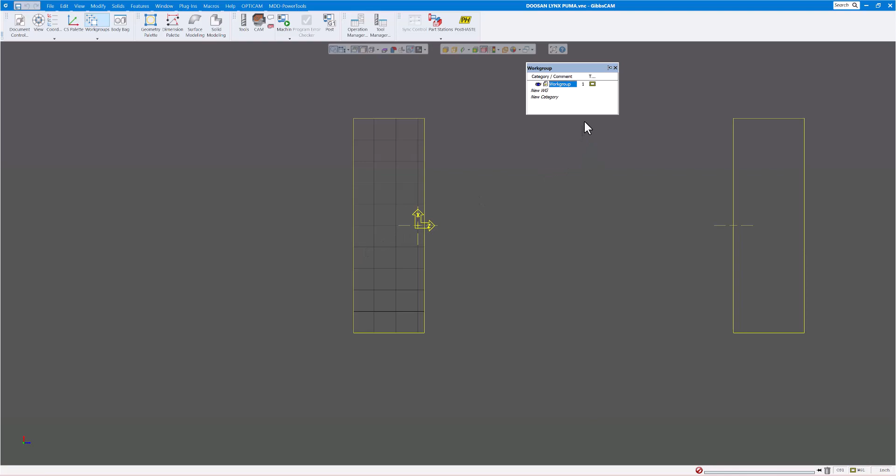So let's get started. I'm going to go to File and New. I'm just going to call this, we'll call it Doosan Lynx Puma. And it's going to open up a blank screen for us.

Next, I'm going to choose the machine, so I'll go to Document Control. And you can see there's a whole tool list here of the different machines that I have in mind. Yours will be different. I'm going to choose this post right here. And I'm not going to really fill in any blanks here quite yet. Now it's going to open up a blank screen, and the screen may or may not look like mine when you open it up, but that's okay.

So the first thing we want to do is, of course, import the file. So let's go to File. We're going to be using a solid model. So let's do import, and this is going to be an MTM part 4. As you can see, there's a little preview here. It's a SolidWorks file, so I'm going to click on Open, and it's going to bring it into Gibbs.

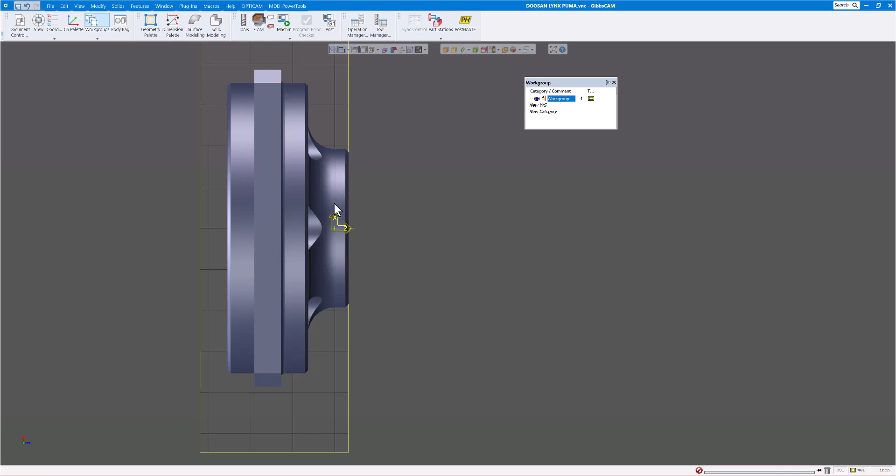Now, as with all solid models, when you bring in a solid model into Gibbs, it's going to put the origin where the engineer decided to put his origin on the part when he engineered the part. And as you can see here, the Z0 is a little bit behind the part here. Now there's a couple ways to put the Z on the front. You can either right-click and say move the part origin to the front.

But an easier way for me is I'm just going to go to Modify and click on Shrink Wrap. That'll wrap material around the whole part there, and this will tell me the actual size of the material or the part that I've imported.

Now, as you can see, I have the main spindle, sub-spindle here, which is somewhat annoying when you go to unzoom, because you want to work on the main spindle or the sub-spindle, and so you have to pan over. So to eliminate that, if you go up to the part stations, and as you can see, it has both the main and the sub-spindle open. I'm just going to close the eye on the sub-spindle. Now when I go to unzoom, you'll see it's only working on the main spindle here. When I get to the sub-spindle, I'll turn this back on. So for right now, I have a shrink wrap.

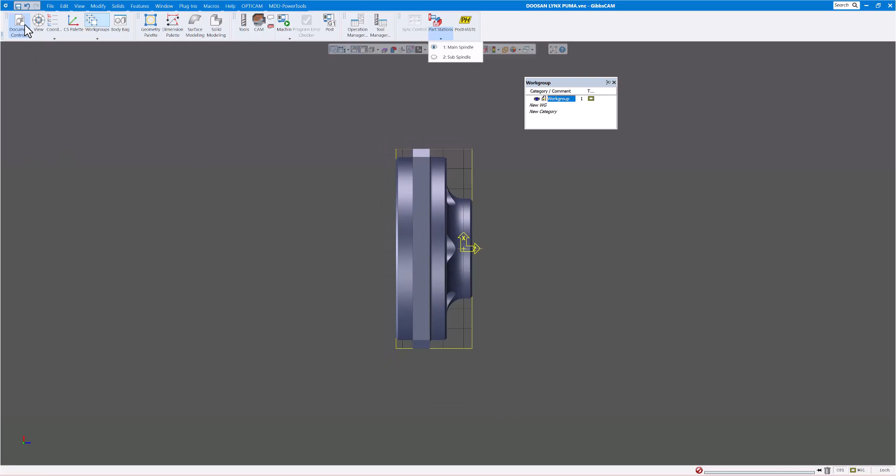Go to Document Control. And as you can see, it says there is material. There's 128 thousandths of material from my Z0 to the front of the part. Well, we always want to program the front of the part as Z0. So when we face off our part at Z0, that will be the actual front of the part. So let's move that just by going to Modify, Move Part Origin. I'm just going to move the Z 128 thousandths, and as you can see, it says Z0 now, and my Z is in the front of the part.

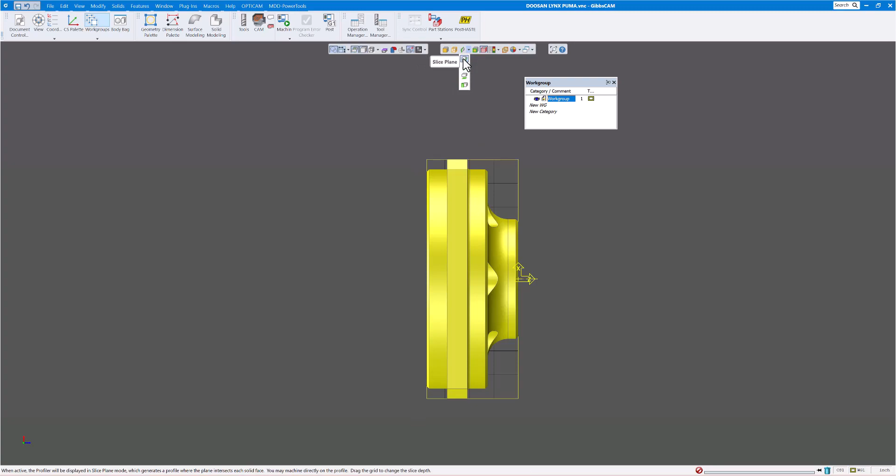Now before I do the diameter of the part, as you can see, doing a shrink wrap does not take into account the flats here, or this little flange here. So first thing I'm going to do, click on my part, and the easiest way to get geometry off of a solid model when you're turning is to go up here to the what we call the profiler, and there's 4 different choices up here. The slice plane, which we use a lot for the XY and YZ, and this one here says slice spun body. So what that does is it gives you the geometry as if the part was spinning in a lathe.

And as you can see, if I click here, right click and go to extract the profile, then I turn this profiler off. As you can see, there's the geometry to cut this whole part as far as the turning goes. And as you can see, this is higher up here. That's because this is the diameter it would be when it's turning the part.

So now if I did a Modify Shrink Wrap again, you can see this has changed. So it wrapped stock around the part here.

If I go to my document control now, you'll see this says 4.069 would be the material we need to cut the outside of that and clear the part. Well, you're not going to find material at 4.069, so the closest material is 4 1/4. So we're going to say 4 1/4 there.

Now we want to add a little material on the front of the part and the back of the part as well. You're not going to cut your material with the saw right to size, so we need some extra there. So I'm going to add 1/8 of an inch to the front, and as you can see, the stock just moved 1/8 of an inch.

Our part is minus 1.125 to the back here, so I'm going to add 1/8 of an inch to that as well, so I'll go minus 1.25, giving 1 1/4 there. So the overall length will be 1 3/8 total on here. I have 1/8 inch in front and an extra 1/8 inch in back, as you can see right on the screen. So now we have to decide where we're going to grab the part with the chuck.

I'm probably going to grab approximately right around here. Probably stay away from this flange, because when I mill the flange, I'm going to do that on the main spindle. I need to have a little extra there so I'm not actually cutting into the jaws with my end mill.

Now I'm going to add a couple of extra points in here just as reference to where I'm going to grab with my main spindle and where I'm going to grab with my sub spindle. So I'll turn on the geometry palette, click on point XYZ, and my first point is minus 1.250, just like it says down here. And the diameter, I'll just put 4 1/4, just like our material is. So there's a point right there, right on the end of the part here.

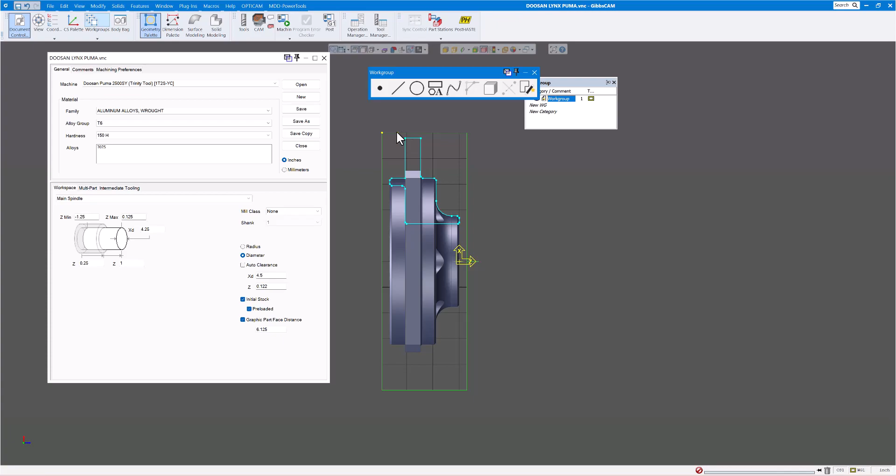Now on this, I'm probably going to grab right about here. Let's just dimension that so we can see where we're at. So that is Z minus 595. I'm probably going to add, actually grab on at 1/2 inch there. So I'll click a point, say minus 0.5, and since that's about 2 3/4 diameter, I'll just put 2 3/4. So this is where I'm actually going to grab with the sub spindle.

If I dimension some things here, let's just dimension from here to here. You can see that's 3/8. Let me bring that on here. 3/8 - grabbing on right there, which you can see is 1/4 inch, and it's 3/8 from there. And if I dimension from the front of the part to where I'm actually going to grab with the sub spindle, you can see that's 1/2 inch there. Okay, and you can always turn dimensions off here if they get in the way.

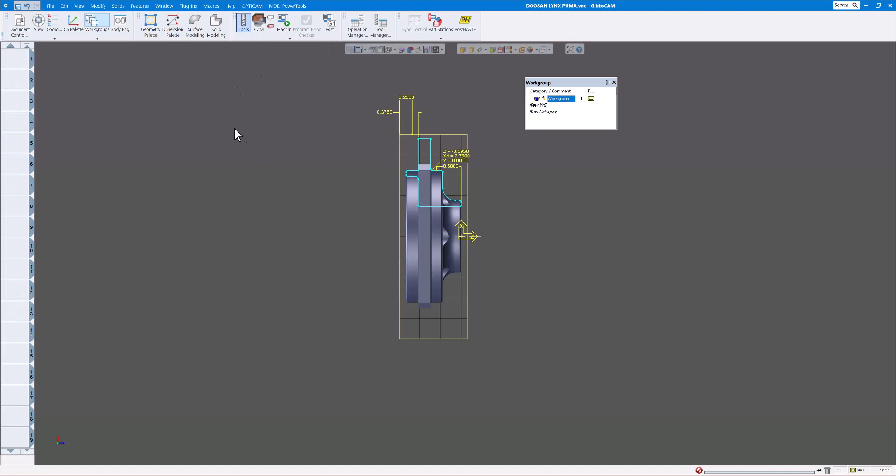So now we have our turning defined here. Next we're going to bring in our tools. I'm going to turn on our tool palette, and I already have the tools predefined, so I'm going to import those in and we'll go through them. If you already have the tool list saved, which is a good idea, you don't have to create them each time. I'll go load tools - I already set the folder where I stored all my tool data, the Doosan tool list. And as you can see, here's the tools. So we'll go through each one individually.

So the first tool I'm going to use is the 1 1/8 drill. This is basically an indexable drill, so it's almost flat at the end. I usually put about 175 degrees on there.

It's not quite flat, so this will give me the closest approximation to actually what the drill is. Of course, you could always import a solid model if you wanted exact, but this is good enough for what we're doing. I have this in position number 1, 2 flutes, tool length offset 1 and 1, and this is just

Actually a carbide insert. And I usually give it a name here so when I'm looking at the code out on the machine I can see if this tool is going to the main spindle or sub spindle. So that's what I usually put right at the beginning on there. Makes it much easier. Also makes it much easier when you hover your mouse over to here, it'll pop up that note saying this is main spindle drill static or whatever name you gave that.

So the next tool is going to be an 80-degree diamond CNMG, 32nd tool nose radius, 1/2 inch IC, thickness 1/8 or 3/16. You can choose either one of those depending on what you have. Even if you chose 1/8 inch or 3/16 or 5/16, the G-code output's going to be the same. What this will do is just bring up different ANSI holders there based on the thickness.

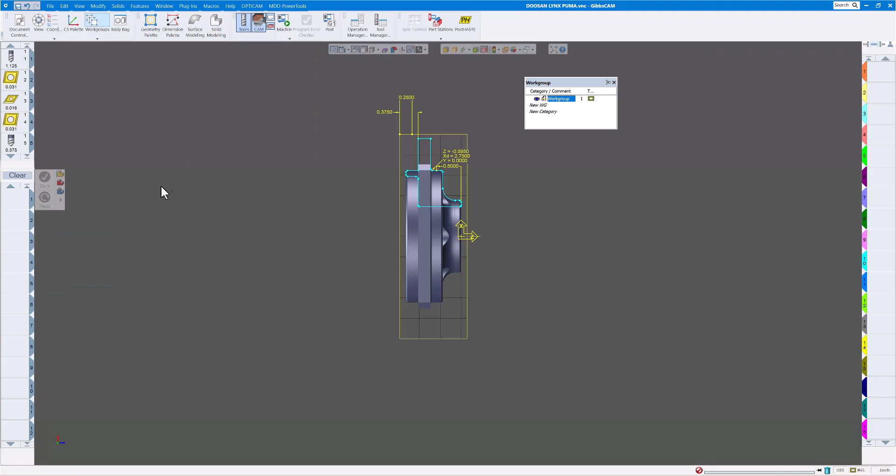Okay, so now we have all our tools defined here. Now let's go ahead and start to machine this part.

Let's turn off our dimensions here.

Before I start machining, I'm going to make a few different work groups here. This first work group, I'm going to name main and sub turning. Let's expand this just a little bit, and scoot this over a little bit. So I'm going to make a new work group, and this one I'll call milling main sub.

Okay, so now I have my work groups named, and of course you can create as many work groups as you want if you want to separate the geometry here, because sometimes if you have too much geometry in one work group, it overlaps and it's a little bit hard to choose. So that's fine, you can create as many as you like.

Now when you have the MTM post-processor loaded for this type of machine, you will automatically have 6 coordinate systems already defined. I actually added these two windows together here, so when I drag them they both kind of match up with each other, so that's fine.

Okay, let's size this up a little bit better. So with the MTM and VMM on your post-processor, you'll have the 6 standard planes there. Let's unzoom this to show you a little bit about that.

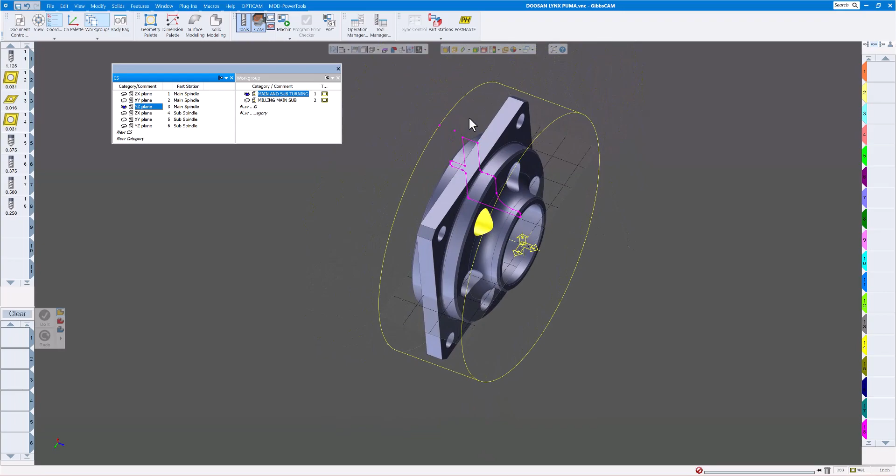and the milling around there. The YZ plane, as you can see, this is for any tool that is coming from the radial side or the top side, the X side. You have the ZX plane, which we don't have turned on yet, but that's for the turning for the sub-spindle. And again, you have XY plane for the sub-spindle and YZ plane for the sub-spindle. So we'll work on those when we get to the sub-spindle.

So let's go back to the ZX plane. And of course, you can create as many other coordinate systems as you would like. If you have holes at odd angles, things like that, and you want to create more coordinate systems, you can always create more. That's fine. These are just the 6 standard ones, which is the most common that we use.

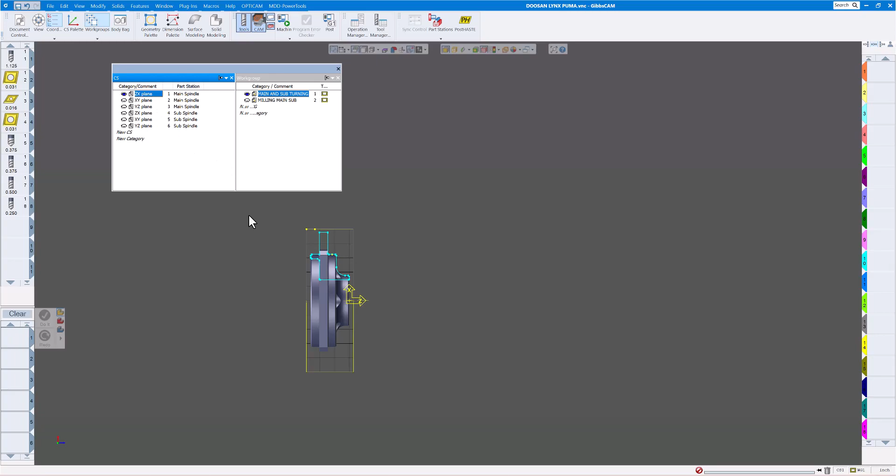So let's start programming this. Let's open up our tools and CAM, which we have already. So the first thing I'm going to do is face off this part. I'm going to use a roughing process along with this tool here. As you can see, as you hover over it, it shows you the description of the tool. So click on that, and that's going to load the tool up.

And I want to do a front face here. So this is where it's going to rapid to. I think in my document control here, let's fill in a few of the blanks while we have it open. I have 1/8 of an inch material on the front, an extra 1/8 inch on the back, and 4 1/4 here.

Also on these two here, these are very important before we start programming. This is the clearance for the tool, meaning the tool is going to rapid to these 2 locations before it starts cutting. And when it gets done cutting, it's going to go to these 2 locations and go home to do a tool change or go to the next process. So these always need to be bigger than these here.

So let's change this a little bit. 4 1/2 is fine for the OD, and this Z, I want to stay 1/4 inch away from the material because remember we have an 1/8 of an inch sticking out already.

Now this graphic part face distance, if I uncheck that, that would mean the distance between the main spindle and sub-spindle on our screen, not the machine, is going to be approximately 24 inches or whatever the machine actually is on your floor. But we don't want to have to pan the screen with the main spindle and sub-spindle being 24 inches apart or longer, especially if you have a 1500 millimeter bed length. You don't want to keep panning the part on your screen.

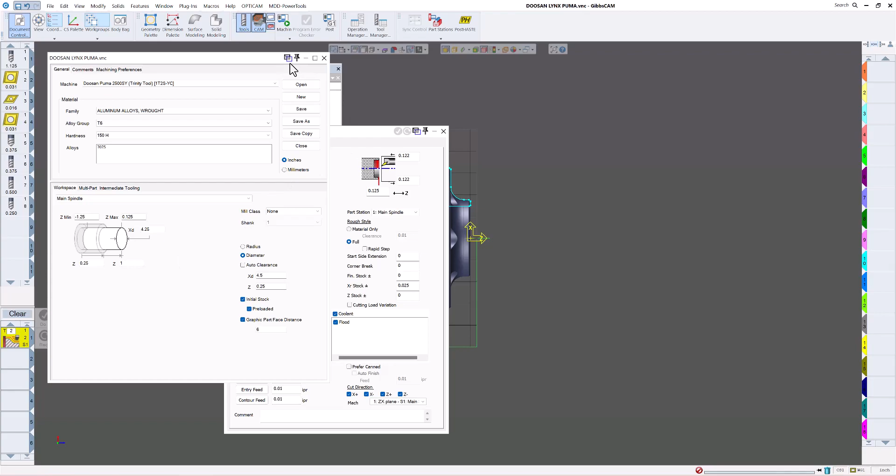As I said in the beginning, I'm going to grab onto the back of the part by 1/4 inch. So that means there's going to be 1/4 inch material inside the jaws of our main spindle. And for the outside, let's look at the total width of my part. Let's bring this back up again, move this out of the way, and bring up my document control.

So how much is sticking out of the front? If I turn on my dimensions here, here's the front of my part. You can see it's 1 inch from where I'm grabbing with the jaws. Then you need to add the 1/8 of an inch there, so this should actually be 1.125 — that's how much material is sticking out of the jaws on the main spindle. This dimension plus the 1/8 inch material we have on the front here. So everything looks pretty good, all filled out correctly.

We're using aluminum alloys as our stock here. So let's turn off dimensions and open up our facing operation again. Here I'm going to rapid to 1/4 inch, and remember we have 1/8 of an inch material on the front of the part. Again, when I'm done cutting, I'm going to go back to 1/4 inch as well.

We're doing a front face, cut forward. Depth of cut, I'm going to go 50 thou. I'm going to use full, not material only — I'm going to use full. And for the XR stock, I'm going to leave 0.

So let's just fix that. But for Z, I'm going to leave about 3 thou because I want to back face with the finish tool to finish that. I want a little bit of stock on the Z, not too much, because if you back face with too much stock using a 55 degree tool, you'll get a lot of squealing and bad finishes.

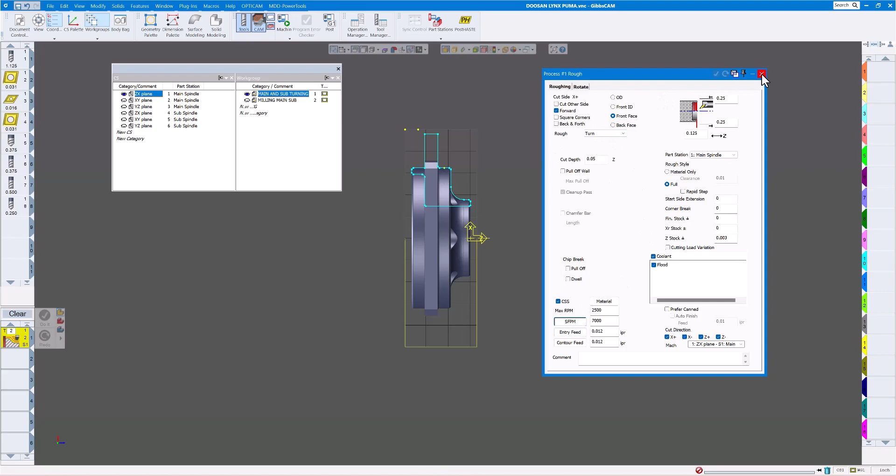So let's zoom this up a little bit. Let's click on this front of the part right there, and make sure we're on the top view. I'm going to take this white round marker and put it above the part there. Of course we want to face down, so I'm going to click the arrow down, and where I want to end is going to be right at 0. Okay, let's click on do it.

And I like that, that looks pretty good. But one thing I want to change is I don't want to face all the way down to Z0, because I have this hole here already and I'm just wasting time going clear down to 0. So like I said, I told you I was going to make some mistakes — this is exactly what we're going to do. So I don't want to face first, I think I want to drill first.

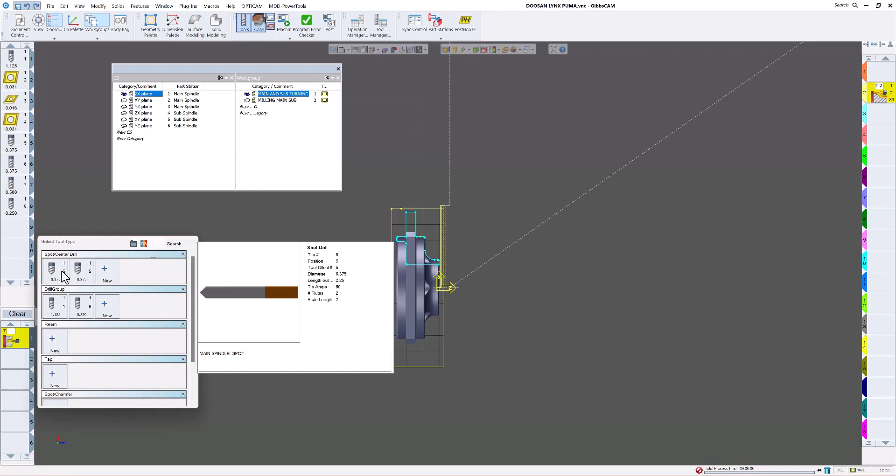So I'm just going to move this operation down here and clear this out. I'm going to double click here, and this time click on holes, and choose this 1 1/8 inch drill. It brings up this process block here. I'm going to click on drill, feed in, rapid out. Again, I'm going to rapid 1/4 inch away and 1/4 inch when I'm done, remembering there's 1/8 of an inch material when I'm starting out. And here you can either program by the tip of the tool or by the full diameter.

I want to do the full diameter. If I turn on my dimensions here, you can see this is actually inch plus 1/8 and 1 3/8. So if I look at my document control here, I can see it's 1.25 inch back. So I'm going to say -1 point.

We'll just say 375 to round it off. It's going to tell you where the tip of the tool is based on the tool angle. So we'll click on RPM and plunge. RPM, I don't really want to go that fast with the jaws. If I was using a collet chuck, that'd probably be okay.

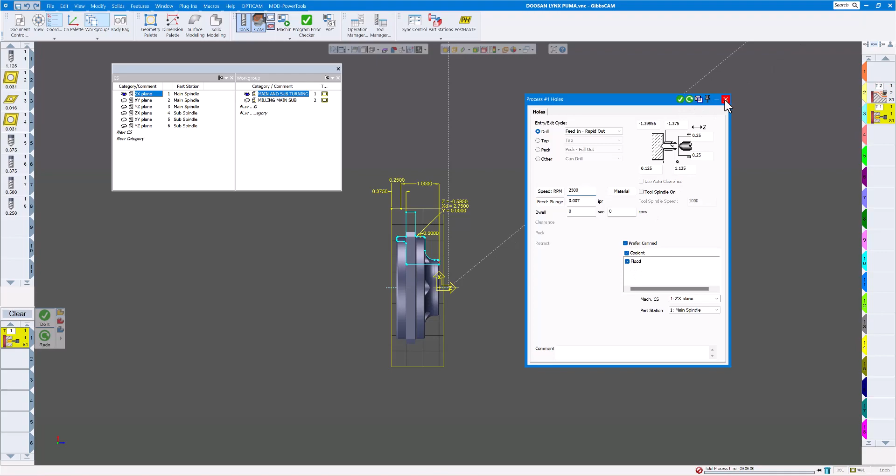But if I'm using jaws, probably don't want to, so I'm going to change that to 2500. Everything else looks good. I'm going to have canned cycle on and flood coolant on. So we'll click do it, and it puts in our process there. I'm just going to move that to the top.

So now the first thing I'm going to do is drill it, and then I'm going to face it off. Let's go ahead and do some op sim here. We'll slow it down slightly so you can see what we're going to do. I'll kind of slice this quarter cut. So there's my drill. That went a little fast. Let's rewind it. Okay, so drill,

face off. If I turn on my geometry, you can see where we cut. Turn that back off. So you can do op sim anytime that you would like. Let's turn off these here.

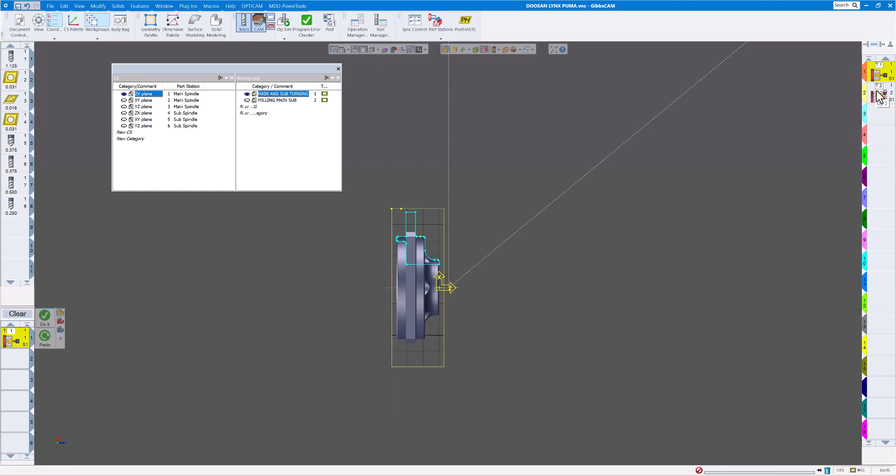So the next thing I want to do, I'm still going to use tool number 2. I'm just going to double click that, bring back that process we used to face it. But now I'm going to change this to cutting OD. Again, our rapid point is 4.5. The material is not 2.52, it's 4 1/4 - that is the stock we're actually cutting from. Again, we're doing OD forward, turning, and cut depth. I'm going to go 1/8 of an inch here.

This is XR, so this is radial. So it's going to take a 1/4 inch cut every time we take a pass. Again, RPM 2500, surface feet per minute, we'll just stay at 1,000. 12 entry feed and contour feed is just fine. I want a canned cycle, so I'm going to click on that.

Now we want to give it a little bit of stock to cut for the finish tool. Everything else there looks pretty good. There, we're on the main spindle. All looks good. So let's zoom this up just a little bit.

I'm going to click on the chamfer, and I'm going to move this tool off there just slightly. Now if you hold the control and shift key down, you can click on the last feature that you want to cut, which is this. Now I could snap right to here, but this is where our jaws actually are, so I'm going to bring it a little bit past there. Now if I want to get more precise, I can right click and say move start endpoint by.

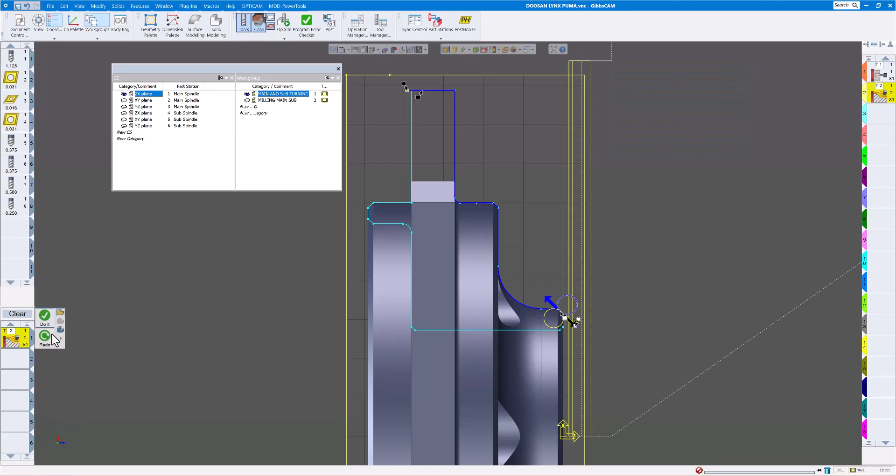And we'll just click on do it, and there's our toolpath for roughing. So let's do Operation Sim again. Facing off. And there is our roughing process.

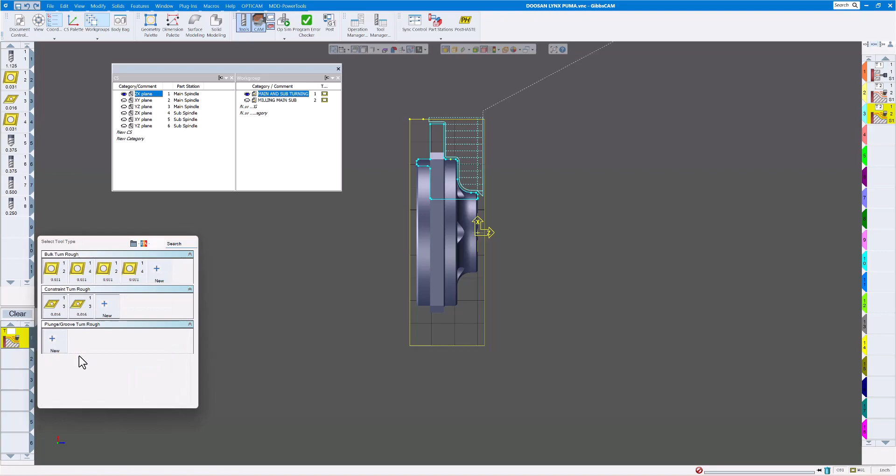So the next thing I probably want to do is bore this out, because I want to relieve any stress. So when I finish this, we're going to have a little bit less stress on there. So I'm going to click on clear, double click here, and we're going to do a rough again. And we want to pick this tool here - as you can see, this is the boring bar.

This time instead of an OD, it's going to be a front ID. 1/8 of an inch, 1.125 is where I want to wrap it to, because that was the drill size that I put in there. So 1/8 of an inch, 1.125 is just fine - that's where I want to wrap it to, out of the part and then back to Z. And this is where the actual material is, so these are all actually the same values here.

So let's change our cut depth a little bit to 80 thou. And again, I'm going to leave stock on the X and stock on the Z. You don't need to put plus or minus here - anytime you leave positive stock, whether you're cutting an OD or ID, it leaves stock on there, so you don't have to worry about plus or minus going the wrong direction. Again, same RPM, same surface feet per minute, and entry feed and contour feed of 12 thou, which should be just fine.

Let's zoom this up a little bit. I'm going to probably click on this chamfer again, going this direction. Control Shift, click on here, and we'll just probably go clear through the whole part here, past our stock.

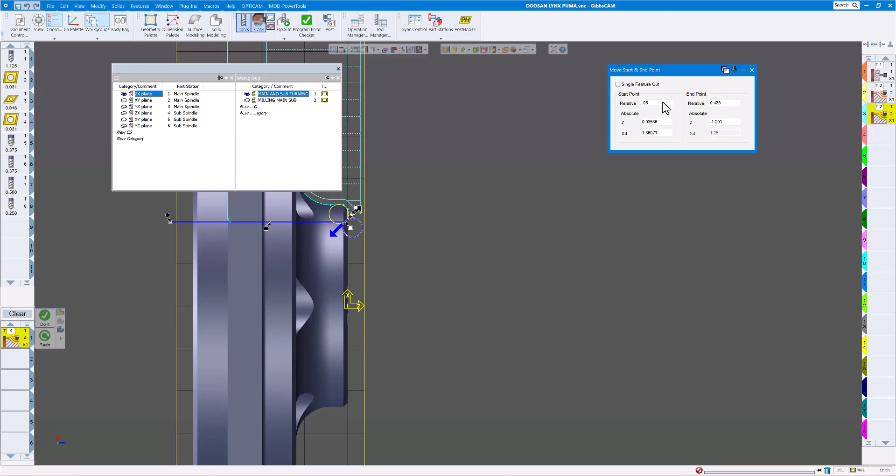If you'd like, you can right click and say move the start or end point. Maybe the start point, let's say 100 thou - that'll get it farther away. If you want to get a little closer, how about 50 thou? That sounds pretty good. Click on do it.

So now we have our roughing done. While we're at it, we're still going to use the same tool to finish. This is aluminum, so we can still use the same tool without worrying about wearing the tip out so much. I'm just going to right click and say change the process - this time I'm going to just do a contour.

Again, ID - if I want, I can get a little bit closer to the diameter, but this isn't really going to matter too much. It'll just wrap it here, then feed up just a little bit. Everything there looks pretty good.

We'll boost this up to 1500 and give it a nicer finish - 7 thou. We're not leaving any stock or anything, so that looks pretty good. Same start and end point, so click on do it, and there's our finish pass. Everything looks pretty good so far.

So let's finish the OD now that we've finished the ID. We can just either clear it or leave this contour in here and choose a different tool by dragging it and putting it on top of that. You can see this is tool number 3, which is our 55 degree OD.

Now I don't want to wrap it to 4.5 inches on the OD, because that's going to wrap it up here, then feed all the way down here. We don't want to do that. So I want to get a little closer to the actual part we're going to cut. Since I'm going to back face this, I want to go approximately the bore size there. So I'm just going to say wrap it to 1 inch away on diameter, and 4.5 when we're done.

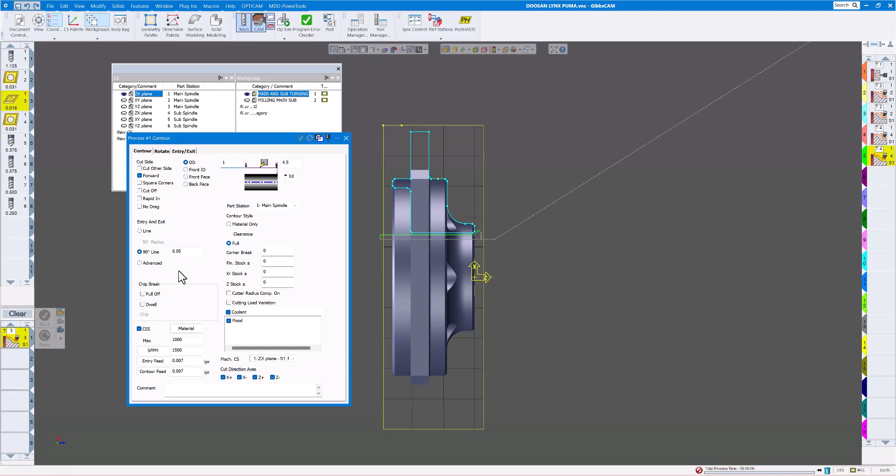That looks good - 90 degree line is pretty good, 50 thou entry there. We'll change this to 1500, and again 7 thou on the finish. Everything there looks pretty good.

This time I'm going to click on the face, drag this marker down to where it starts on the ID of the part, Control Shift again to the end there, and just go past this a little bit, then click on do it. So now we have our finish pass.

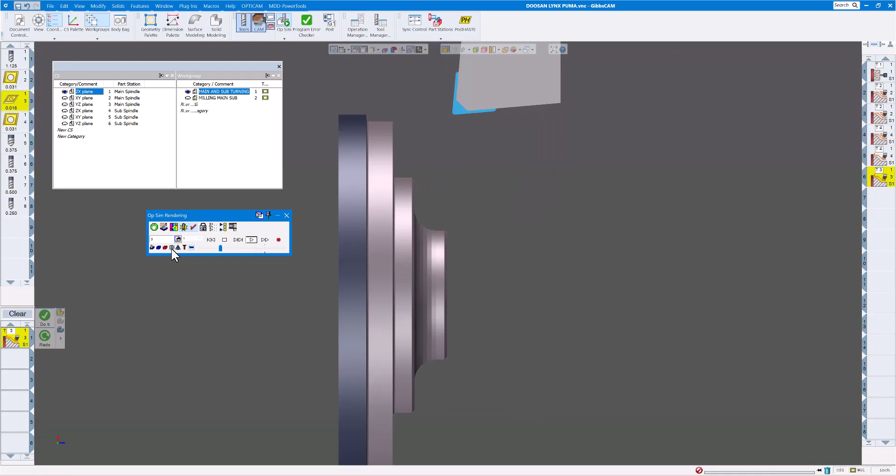So now if we do the operation sim, this should have pretty much all of our turning done. So there's our drill, and our roughing. We'll do a quarter cutaway there. There's our boring bar - finish.

Finish outside. Now if you want to color code this when you're doing rendering, that might help you find any mistakes you've made. To do that, just click on this button here, cut color mode, click on that and say I want every tool to be a different color. Of course you can choose the colors you want by double clicking and changing the color if you don't like the ones there.

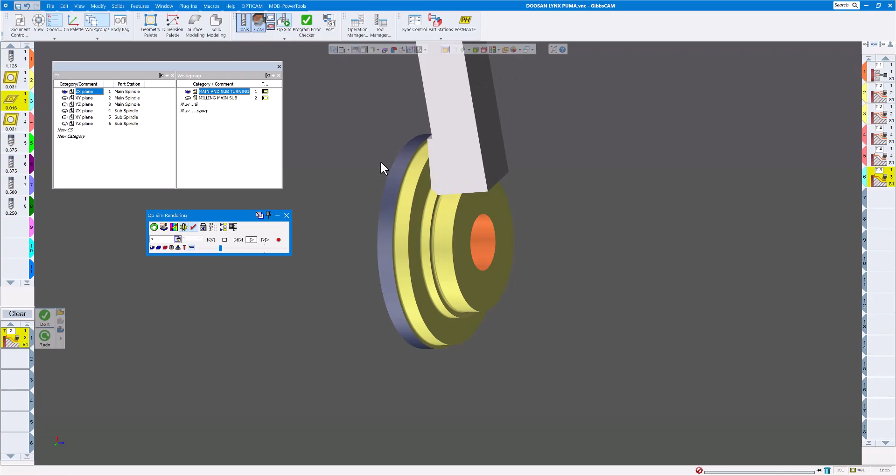Now if I render this again, you're going to see the different tools use the color that I chose when I clicked here. So there's our finish.

Now you can smooth up the rendering as well just by right clicking, going to the settings, and you can change this to custom, fast, or accurate depending on how you want this to look when you render.

So now let's start programming the milling here. Let's turn off our rendering and rotate the part a little bit to see it better. I'm going to turn the stock off just to clarify it a little bit, and we're going to go to our work group milling, main and sub-spindle, so you can see it made the turning geometry disappear. Let's move this out just a little bit.

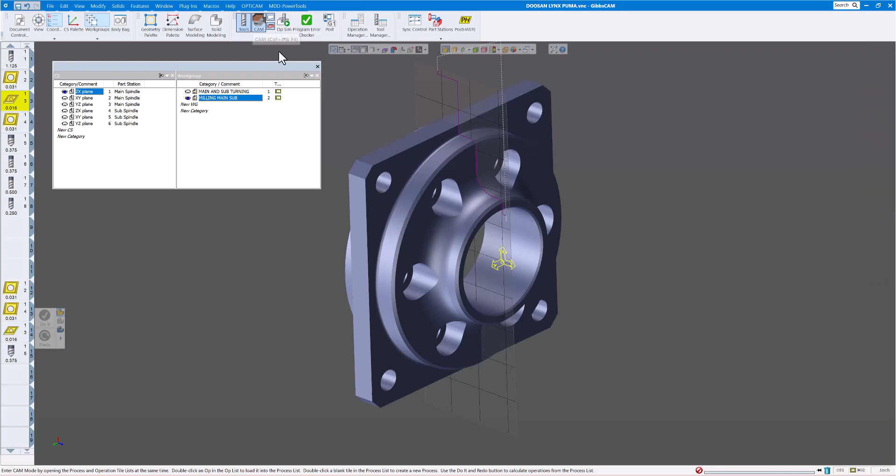Okay, so I'm going to turn off cam. Anytime I'm messing with geometry or creating geometry, I usually turn off the cam so I don't accidentally delete something I didn't want to delete. So there's a couple ways you can do this.

I'm going to first just click on this face because I need the geometry on the outside of this part as well as the hole. So I'll click on this face and go to extract edges, click on do it. First I need to go to the XY plane, of course, make sure I'm on the right plane. You can see that I have the outside there ready to mill and the 4 holes there. Now on this here, basically all I need to do is click right here, click on do it, and that's probably really all I need.

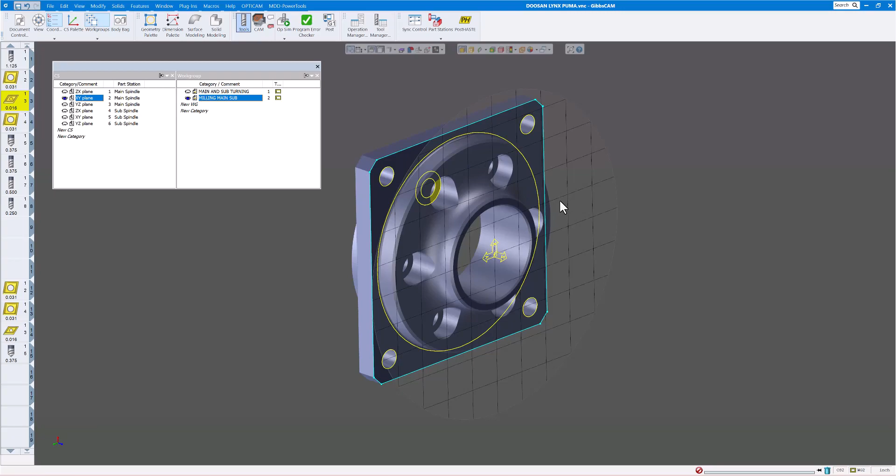Because this part is too big to do XYZ, you don't have enough Y travel to keep the C-axis still and do this hole here, here, here, because you're going way below the spindle, probably farther than the Y has travel. So we need to actually do polar and cylindrical, so we're going to finish this hole and then rotate the part to do this hole, this hole, this hole. Same with the outside - there's not enough Y travel to reach all these. If it were a smaller part, you could, but we're going to do it using polar and cylindrical.

So let's bring up our dimensions, actually dimension some of this. Of course you should have a print for any part you're working on, but we're going to dimension these anyway. So I have a 1/4 inch there, 7/16 there, and I think that's about all we need on this face here.

So let's open up our cam section again. We'll clear out any old processes over here. The first thing I want to do is probably run an end mill down through here and rough this out, and maybe finish it right to size. This is just clearance for the holes, so it's not really a tight tolerance. This is a 438 diameter hole, so I'm going to use a 3/8 end mill.

So what I want to do on this one is use a contour - this is the milling section, not turning - with that 3/8 end mill there. Now the first thing you always want to do before you start filling in these blanks is make sure you're on the right coordinate system. By clicking on the rotate command, you can see which coordinate system you are in, or what you need to be in. So we have the ZX, XY, and YZ plane. We can't use the YZ plane because that's coming from the front, the top radially. We want to use the XY plane, and you want to be on the XY plane up here as well, just as a good reference.

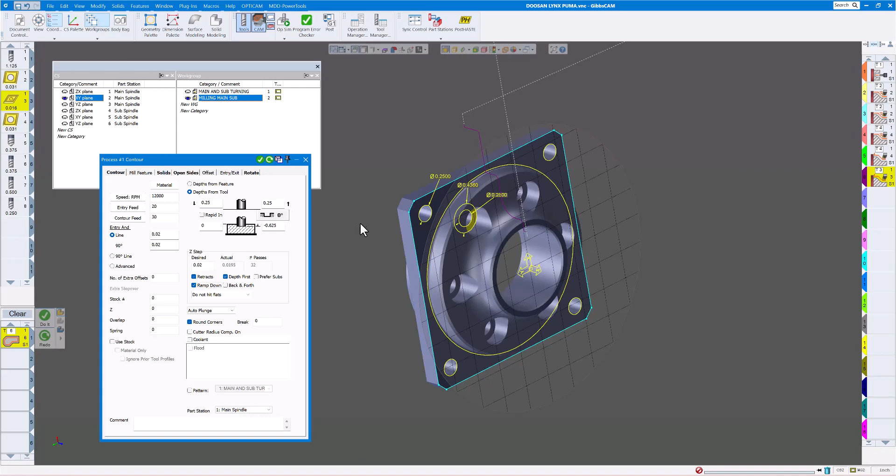So let's just go to our home view. What that's going to do is bring our part facing our screen, our coordinate system facing the screen. I'm going to click on here, and we want to probably climb mill, so I'll go this direction and of course cut on the inside there. Click on do it, and let's look and see how it looks. Just go to ISO view, and you can see our tool path is a spiral tool path. We might be starting out a little bit farther away. Let's just run this and see what it looks like, and then we can adjust it if we need to.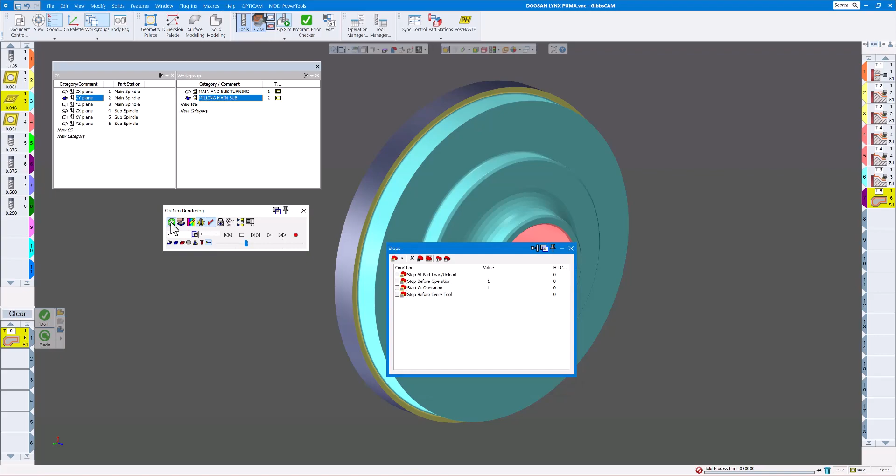So on the turning, I'm going to click on this little stop sign here, and click stop before operation. Our first milling operation is number 7, so I'll click here and go down to number 7. This way I can speed this up, so I'll rewind and speed this up, and you can see it stops right before operation number 7.

You can see I have operation 6 here, so let's slow this down and do the rendering. Let's speed this up just a little bit. You can see I'm cutting quite a bit of air there.

So maybe this is a mistake, that you want to get a little bit closer to that part so you're not cutting a lot of air, especially if you want to be more proficient. So let's fix that first. Let's open that up, and let's rapid to actually, let's say -1/8 of an inch.

And let's say our material, we could pull geometry off this edge right here if we want to get a little bit closer. I'm just going to say -1/4 inch there. And let's click on redo, and you can see our toolpath has gotten a little bit closer to that. That's pretty close there. Let's render it and see if we want to make any other changes.

So let's speed this up a little bit and slow it down then. Here's our tool, let's actually do a transparent tool. Let's rewind, do it again, slow it down. And that actually looks pretty good. We're not really hitting any material.

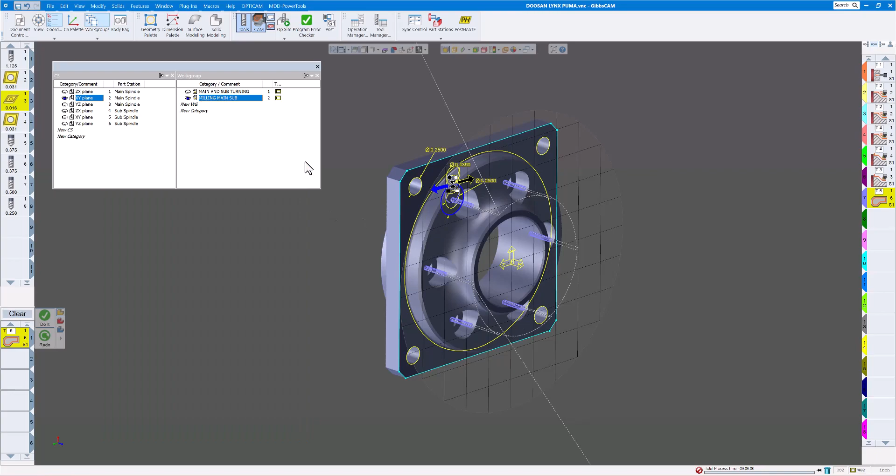Okay, so the next thing I want to do is probably spot drill these holes here and these holes here before we drill the 1/4 inch hole through there. I'm going to turn this off.

So I'm going to clear this out, put in a hole operation, and this is going to be with the 3/8 spot drill. So I can either drag it down on top of there, a couple ways you can get the tool in there.

So again, make sure you're on the right coordinate system, XY plane. Let's change this while we're at it, so I need to do 5 times at 60 degrees. So we're going to do the first inside holes first.

Let's go back to the drill command. And again, I want to, we know if I was to alt click the flat there, you can see that's 5/8. I don't want to really rapid to 5/8, so I'm going to rapid to 0.5. And the material we're cutting is actually -0.625.

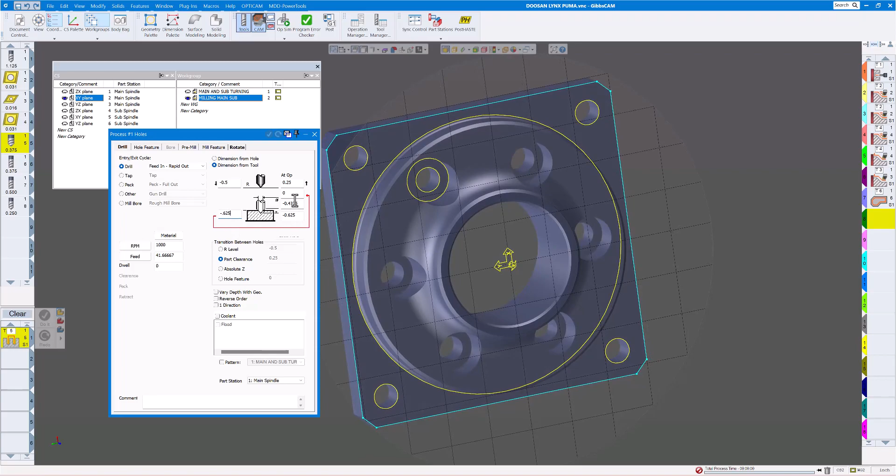Now once you have this in there, then we can use this to have Gibbs calculate the depth we want the tool to go. Now we could do it by the tip or the full diameter, but we're kind of guessing there. But if on this diameter symbol here, if you say this is going to be a 1/4 inch hole, I want to put a little bit of chamfer on there. So maybe I want it to cut 0.2, we'll say 250, how about 270? That'll give me basically a 20 thou chamfer on there.

Put in your RPM and your feed rate there, and how you want to go in. I'm just going to feed in, rapid out with this spot drill, so that looks pretty good. So I'm going to click on this hole and click on do it, and there's my spot drill to cut all the 6 holes there.

So while we're at it, I'm going to do the same thing up here with the 4 holes. We might need to change a couple things based on the depth there. Again, click on where our material is, alt click, and I can see that's 5/8 there as well behind there. So everything else here will be just fine.

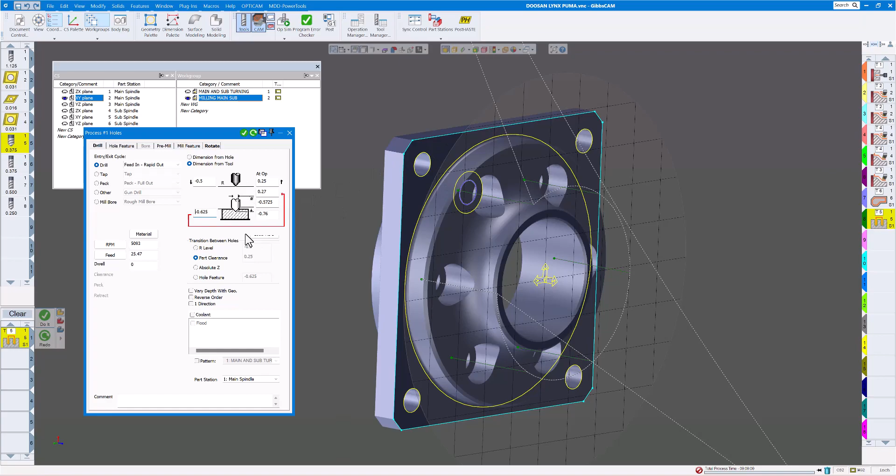So again, one thing we need to change, don't want to make a mistake here, open this up. We don't want to drill 6 holes on the outside there, so I'm going to say 3 more holes at 90 degrees. So we're already drilling 1 hole, so I need to add 3 more times at 90 degrees. So click on do it, and now I have the 4 holes on the outside there.

So if I was to render this now, we have our stop on still, so let's finish the turning. Let's go back to our milling now.

We have our first hole. We'll speed this up a little bit. Now you can see the part, the tool is moving around the part in an XY location.

That's because we have this, this is called POV locks, stands for point of view. If we click on this, instead of having a fixed part, I'm going to click on machine so it can actually show us what the C-axis is doing there.

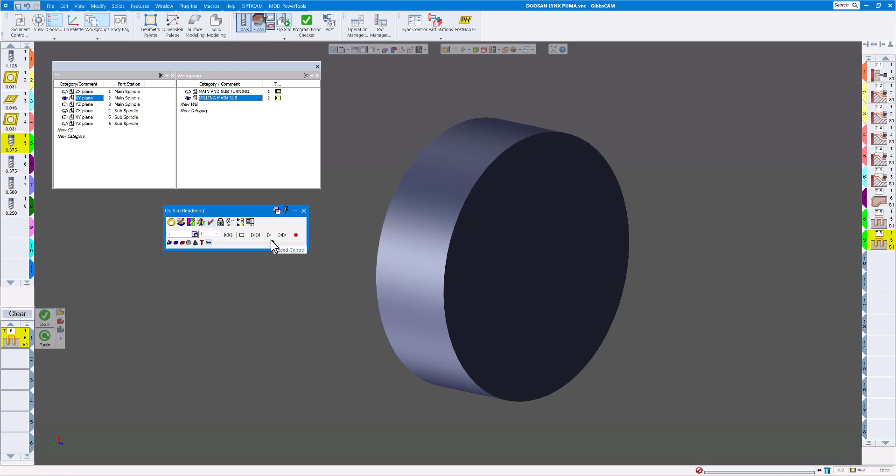Let's rewind this again. Our stop is on, so let's go now to number 7. We'll speed this up slightly.

You can see the C-axis is moving, polar and cylindrical. Again, the next one. And our holes as well on there. So now we have the holes in here and we've spotted them.

Now we need to do the 1/4 inch drill to drill through there. So let's do the 1/4 inch holes now. Let's bring up the 1/4 inch drill. We're still doing a drilling process, but this is with a 1/4 inch drill now. Tool number 8.

Again, we're going to rapid, let's see, 1/2 inch away. That will probably be okay. Let's start out with the 4 holes around the outside.

As far as the depth goes, let's click on this button here, rotate it around to the back there, use the Alt key, click on there. You can see that's minus 875.

Let's go a little bit deeper. I'm going to go minus probably 1 inch. We'll just keep it there.

I'm just going to do feed in, rapid out. It's not too thick. If you want, you could do peck pull out, peck whatever you'd like here, peck chip break, whatever you'd like. Let's do...

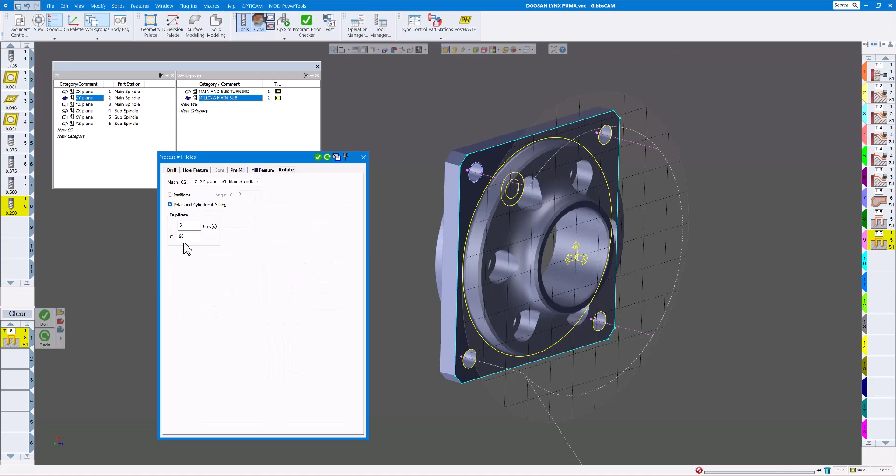So let's just click on the first hole, click on do it, and now we have our drill cutting back here. We're probably rapiding a little too far away there, so let's fix that.

Let's open this back up and rapid a little bit closer to the hole. Let's stay at, actually let's go to the R level here and change that. That should get us a little bit closer to our part.

Before we render, let's do the inside holes as well. Let's click on the first one there. I think everything there is good except for the depth.

Let's check the depth there. We want to make sure we're drilling at least past this flange here. So again, Alt click, and that's minus 7/8. So let's just go minus 1 inch again.

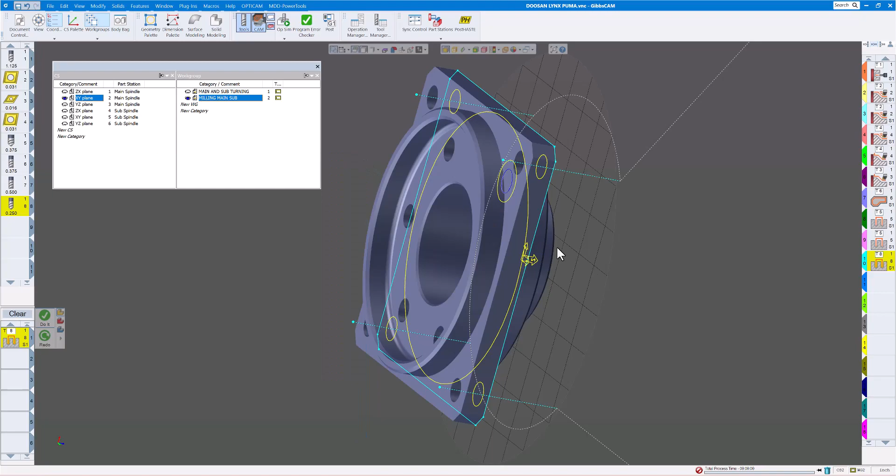We have this hole selected, but we need to change this to, let's open this back up, 5 more times at 60 degrees. Click on do it. Now we have the smaller holes as well.

So let's render this and let's see how this looks. Turn our rendering on. This time we change this to stop before operation number 8, which is our drilling. So let's render this.

We'll speed this up since we don't need to look at that again. Let's slow this down. Now let's do the drilling. So there's our spot drill, there's our spot drill on there. Now we change to the 1/4 inch.

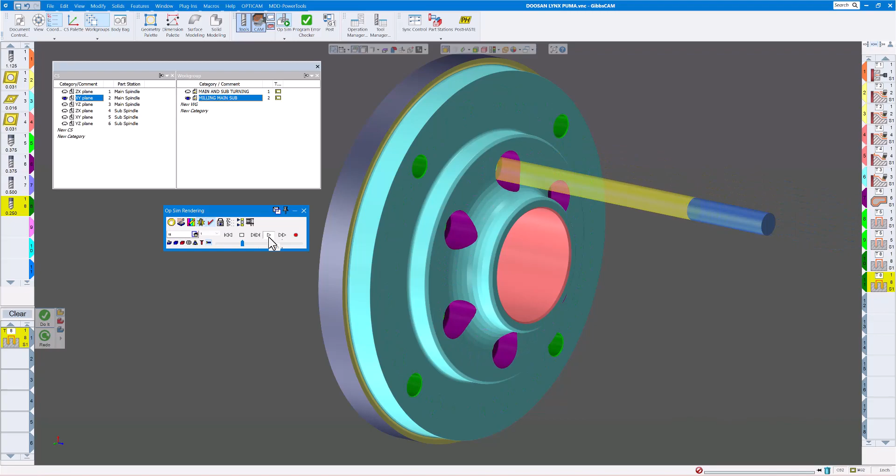And our 6 holes here. Let's take a look. Everything looks pretty good there. We have nice chamfers on our holes, and everything there looks good.

Now we're ready for the sub-spindle to come up and grab this. So let's just turn off rendering, go back to the front view there.

Let's clear this out. First thing we want to do is get the tools out of the way. Even though the sub-spindle should clear out the tools in the turret when it's at home, I usually like the turret to be closer over to here so there's no chance of interference with the sub-spindle coming forward. So we go down here and click on this utility op.

It has a big U there, and I'm going to use the tool that's in the main spindle, the turning tool. The reason I don't use the turning tool for the back side is if I tell the sub-spindle tool to go to Z0, it's going to put everything farther to the left here, and I don't want any chance of any drills or anything going through the sheet metal on the left side.

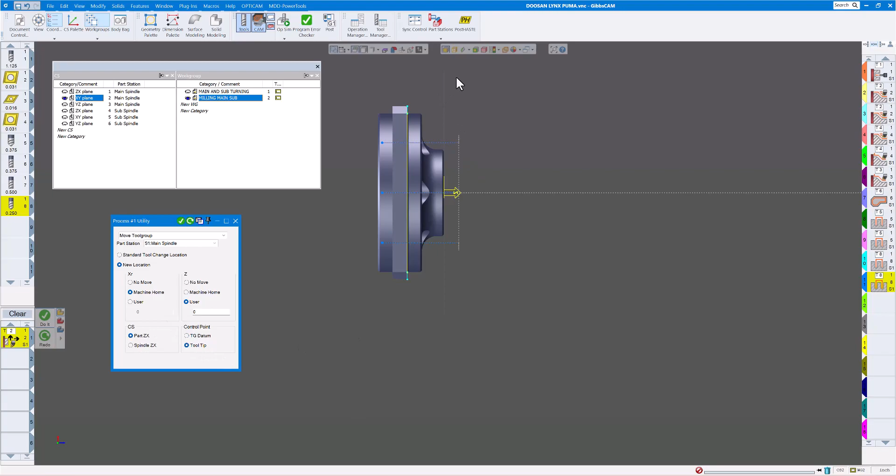So I'm going to choose first move tool group, so that's going to move the turret, and we want to make sure we have the main tool, the first tool that's used on the main spindle there, and I'm going to click on new location. I'm going to say machine home on the X, and on the Z I'm going to put a user, and say move this tool to Z0, so it's going to move the tool right to Z0 right here on the upper turret, but keep X at home. I want to use the part ZX, not the spindle, but the part and the tool tip, so that means it's going to move the tool tip to Z0. So I'm going to click on that, and that gets my turret out of the way.

Now I want to bring the sub-spindle forward. I'm going to open up a utility again, but this time I'm going to change this to sub-spindle in. So the main spindle is the main, sub-spindle here, just like that. The part is in the main program. Spindle on. Usually I like to have the spindle on even though I'm not doing any turning while it's transferring, because with the spindle on, we usually have the air blow come on to blow the chips off the sub-spindle, so you don't get chips stuck in the jaws. So 500 RPM is pretty good.

Forward. This is the Z clearance, so I'm going to say rapid a half inch away from the part. So the sub-spindle is going to come within a half inch away from this part. It's going to do this in a rapid, and then we're going to feed onto this and then grab it. So usually I start out at 20. The standard is 200, which is a little fast to start out with when I'm testing the program in the machine, so I usually like to do 20, and then I'll come back and change that to faster.

Now, how far do I want to grip on this? Let's actually go back to our main and sub-spindle ZX plane. As before, when we started this, I said we want to clamp right on here, which is a half inch back from the main spindle. So let's highlight this, hold the Alt key down, click on here. You can see that's a half inch right there. So click on do it.

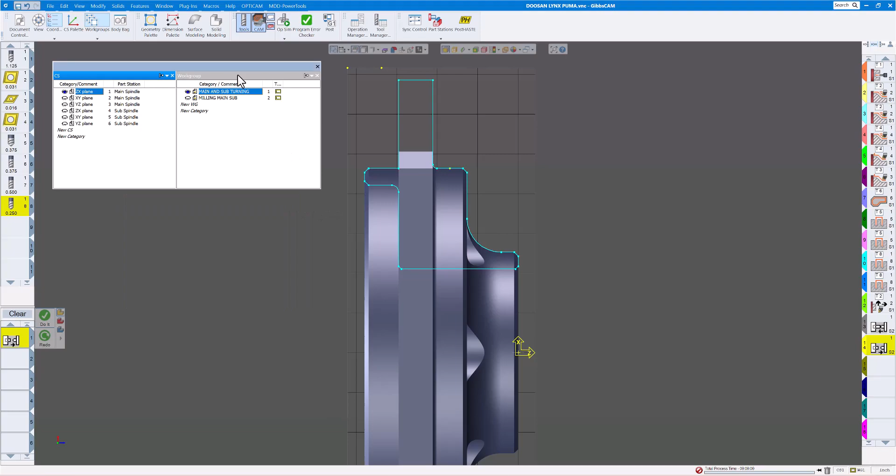And now we should have our part in the sub-spindle. So let's close a couple of these boxes here. I'm going to actually turn on the sub-spindle now, so you've had it off this whole time. I'm going to click here and click on the eye there for the sub-spindle. If I do an unzoom there and turn on my stock here, you're going to see there's my main and my sub-spindle. So I need to get this solid model over to the sub-spindle so we can pull geometry off this for the milling and actually bring the geometry over as well at the same time. So I'm going to turn off cam like I normally do.

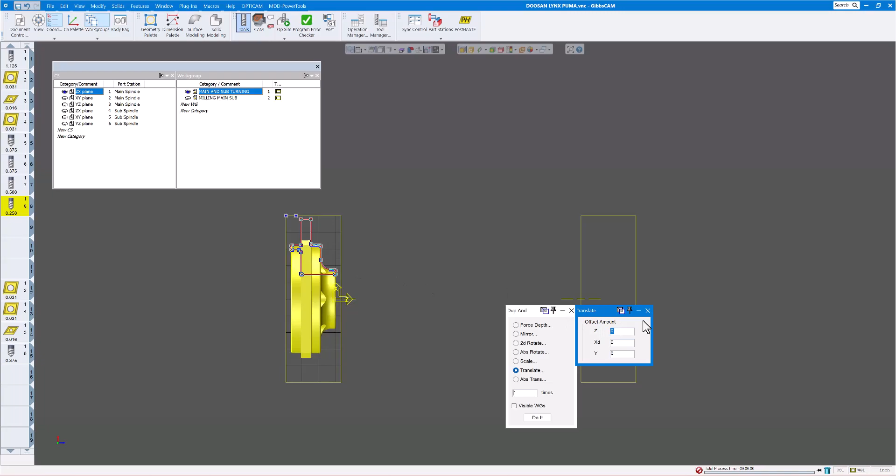I'm going to hold the shift key down and select everything that I have on the main spindle. Then I'll click on modify, duplicate, and translate. On our document page in the beginning, I had 6 inches in there, so we're going to move this at least 6 inches, that's the distance between our spindles. And our part length, if I turn on my dimensions there, you can see our part's 1 inch plus 3/8, 1 inch plus 1/4 inch plus another 1/8 inch there.

So we'll go over here, 6 plus, we're going to do 1.375. So we're going to move it 7 3/8 basically, and that's going to put it over in our sub-spindle. Now we may or may not have it correct over here. This is one of the mistakes I see quite often, which is really easy to do.

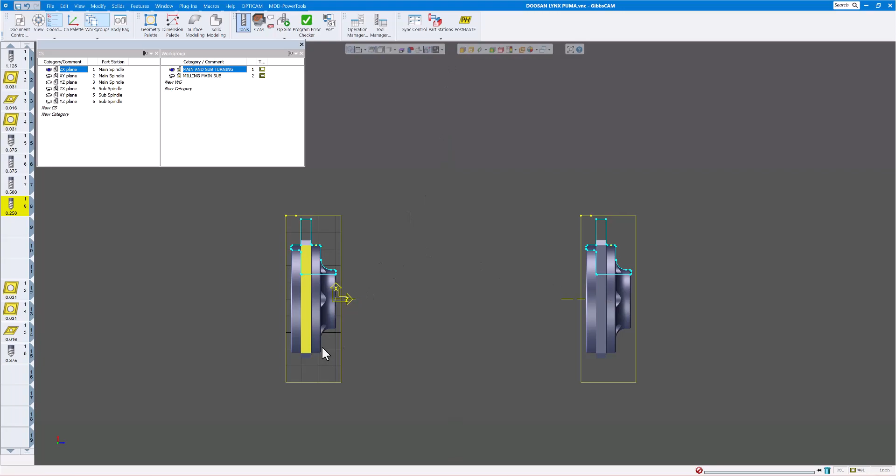So I'm going to first make sure everything's in the sub-spindle. The only thing we did here was basically copy the part and move it over 7 3/8 inches. Gibbs does not know this is in the sub-spindle—all it knows is that we took this part and did a copy and moved it over 7 3/8 inches. So when I click on this solid, if I turn off face selection, you can see both solids are highlighted, so we want to make sure we separate those before we do any movement of the sub-spindle.

Let's click on the solid modeling palette, click on this separate button. That's going to separate the solids into two different pieces there. Now we want to tell Gibbs that everything over here is in the sub-spindle.

So I'm going to click on this ZX plane here, my coordinate systems, and as you can see this is purple. Gibbs changes this to purple, which is telling you this is not in the coordinate system you think it is. So I'm going to hold the shift key down, highlight everything over here, and all I need to do is right click and say change this to this coordinate system. Now you can see everything is associated with the sub-spindle over here, and this is purple, which means it's in the sub-spindle.

So if I go over here, you can see this is all blue, which means this is the main spindle. Everything's purple over here—this is in the sub-spindle. Pretty easy to distinguish which is which. Now if I want, I can turn off the main spindle, so when I go to unzoom, it just zooms up the sub-spindle here.

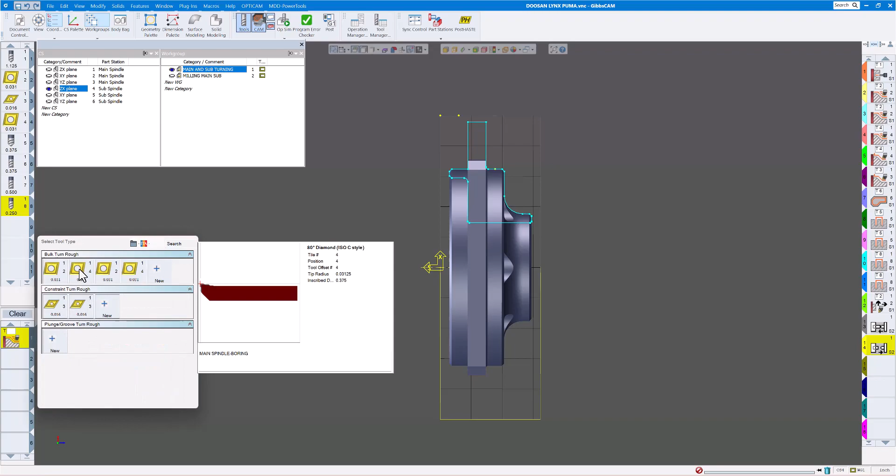So what we want to do here is, of course, finish turning this and then finish milling this. I'm going to turn on my cam again, clear out anything that's over here. The first thing I want to do, again just like we did on the main spindle, is face this off, so I'm going to bring up a roughing process. This time it's going to be with the sub-spindle tool, the 80-degree diamond.

Front face—make sure you're on the sub-spindle, not the main spindle. Everything there is about the same as before. Cut depth, I'm going to change this to 50 thou. XR stock, zero that out—I only need stock on the Z. Everything there looks pretty good.

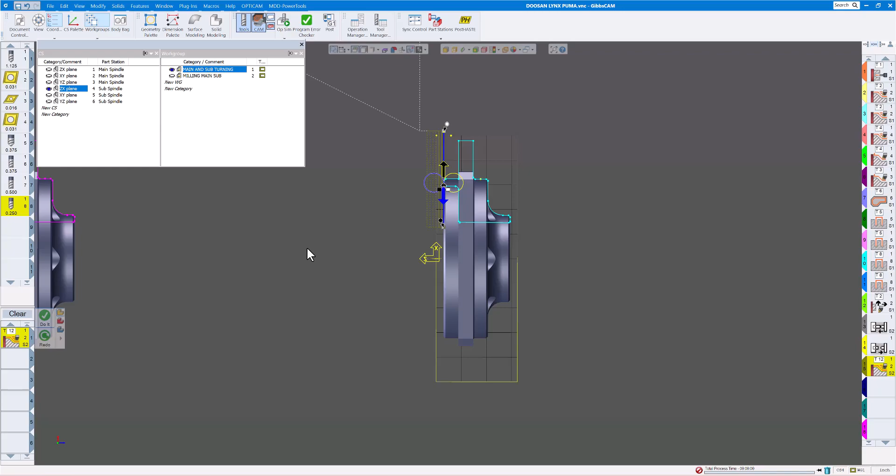Okay, I'm going to click on this face here. Cut down, so starting from the top and cutting down that direction. I'm going to move this up here because we still have stock over here at 4 1/4 inches, but we have the hole clear through, so I just need to bring this probably a little bit below there. You can always right click and move it to exact places you want to go, but that's pretty good there. So there's our facing there, but one thing I want to do that I noticed—like I said, I'm going to make mistakes here on purpose. You can see the front of the part here is not equal to the face here, so let's fix that.

So this will be a common mistake a lot of people will make. I want the sub-spindle Z0 to be right at the face there. So if I was to dimension this, you can see the Z is 1/8 of an inch from our coordinate system. So I want to move everything basically forward from there.

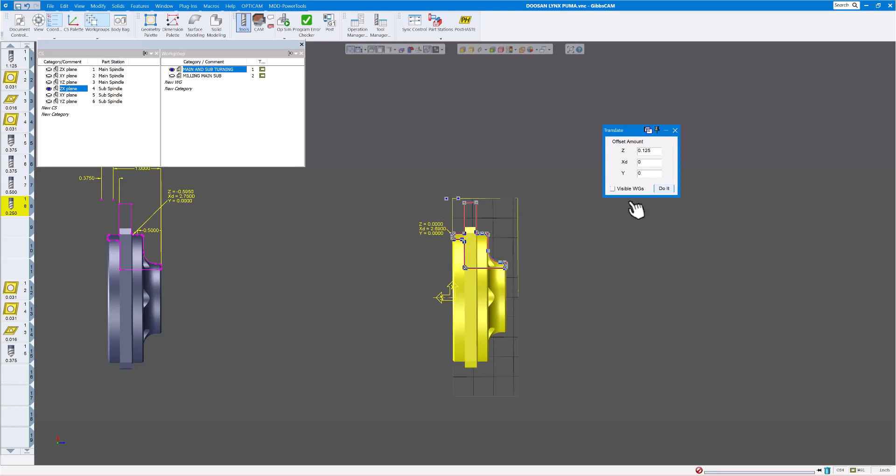So I'm just going to click on here, turn this off, and I'm actually going to translate that. Now this is the positive direction, so I want to move the Z 1/8 of an inch. Now you can see this changes to Z0—the front of my part is actually at Z0. So we fixed that. Normally I fix this before I start doing the toolpath, but that's okay, we did it a little bit differently.

Now on the sub-spindle, we need to, of course, there should be an 1/8 of an inch material on the front of this, so let's go to our document control. We haven't changed anything on the sub-spindle yet, so let's click the arrow down, go to sub-spindle, and you can see we need to add the 1/8 of an inch there. And our diameter, and there—everything looks pretty good there. We just need to tell it how much stock is actually sticking out of the spindle.

So what is sticking out and what is holding into our jaws? Remember, we grabbed onto the part at 1/2 inch, so inside the jaws is actually 1/2 inch. And if we take our overall part length, which is 1 3/8, we'll just type that in. That's the overall length including the stock on both sides, so that's 1 3/8. We grabbed on a 1/2 inch there, so if I click minus 0.5, we're actually at 7/8 of material sticking out, and we have 1/8 of an inch material on the front.

So everything looks good. Clearance plane looks good, graphic face is the same. Now you have this box that says initial stock. You can see if I click on that, it adds more values here. What this means is if you had stock already in the sub-spindle before you started machining, but we don't in this case. So now we'll go through the rest of the processes.

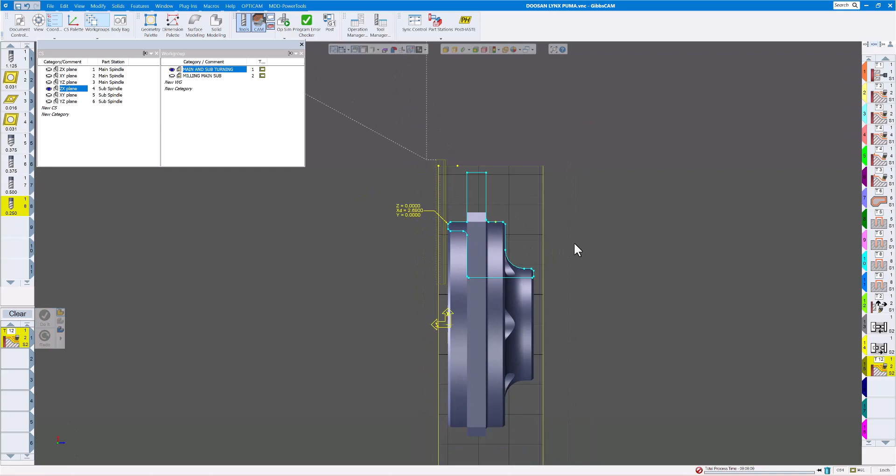Now let's use the same tool, and we need to rough the outside. Open up this process, go to OD this time. We don't want to start at 1 inch, so 4.5 is where our clearance is, and 4 1/4 is the actual material. Everything looks pretty good. Let's add 10 thou stock, 12 thou, since we're roughing. Everything looks pretty good. Let's go 100 thou on the depth.

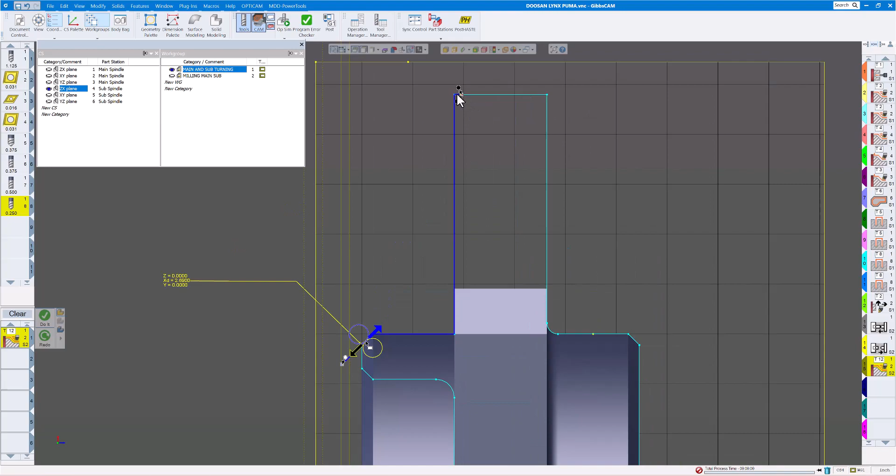And again, let's click on the chamfer, start out a little bit there, and end going this direction. Maybe end right at this point so we don't recut that. And click do it.

Okay, now let's do a boring bar. We need to bore this out and take a finish pass. So let's use the same roughing process, just change tools. I'm going to take this tool here, our sub-spindle boring tool. Let's just drag that tool on top of there.

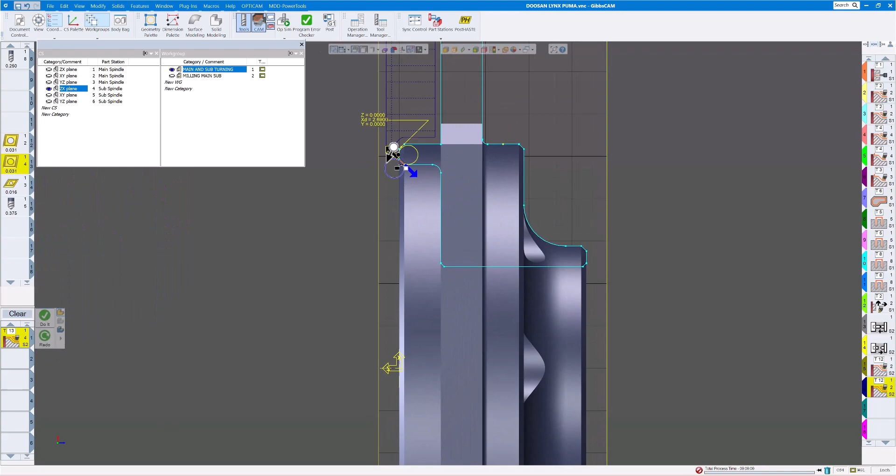Do front ID again. Everything there is the same as before, leaving stock. Everything looks pretty good. Let's change this to 80 thou. Zoom this up, click on the chamfer, start outside our part, Control Shift, and it's actually right on that point there. We'll go a little bit past it when it cuts, and do that toolpath.

Now let's do the same thing. Let's clear this out and finish with a contour using that same boring bar tool. Front ID, make sure you're on the sub-spindle. Everything looks pretty good. Speeds and feeds look pretty good. We have the same shape selected almost. Let's start out here a little bit and finish. We'll actually finish on this chamfer a little bit past there. And click do it.

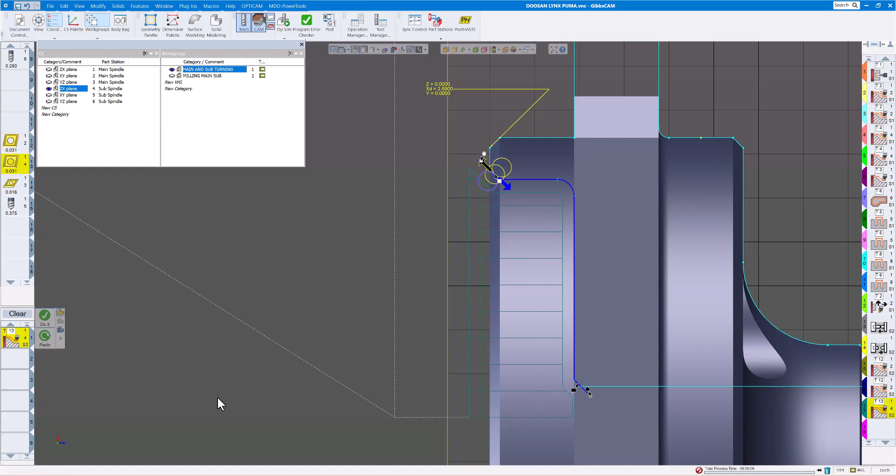Now we have our OD and ID finished on here. So let's save everything, then do a cut part render to see where we're at. Let's first turn off our dimensions. Let's open up our op sim, rewind, and I'm going to click on this stop sign and tell Gibbs to stop before the part unloads, or basically goes over to the transfer location for our sub-spindle. So let's play this.

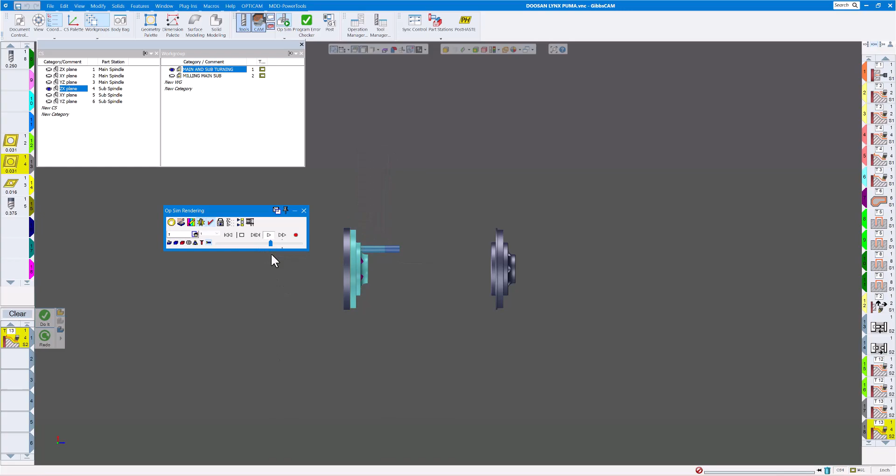Actually, we need to turn on the view if you want to see the main spindle. So let's rewind this again, play. And let's speed all this up. Let's watch the transfer now to the sub-spindle. And there's our sub-spindle turning. If I were to do a cutout, you would see our main spindle work good, and the sub-spindle.

Now one thing you're probably noticing is, wow, I forgot to cut the flange on here. Everything went to the sub-spindle. Everything looks pretty good there, except I forgot to cut the flange. Well, that's okay, easy mistake. Let's fix that.

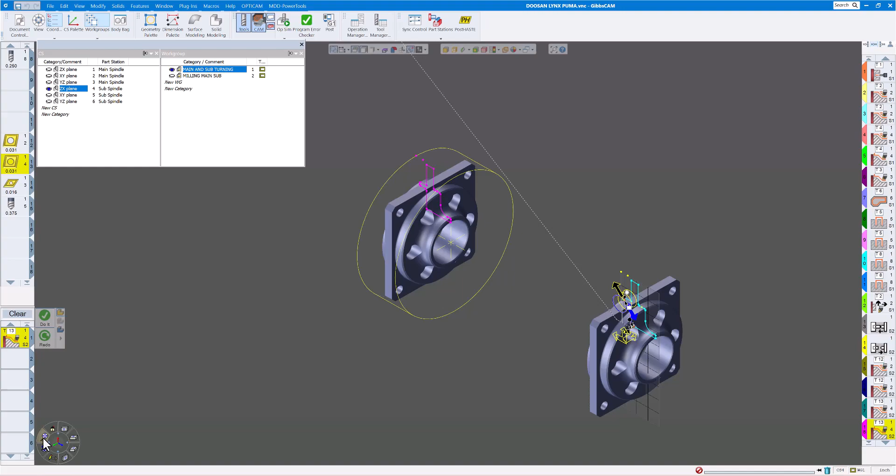I'm going to turn off the sub-spindle for now, just so we can see the main spindle here. And I'm going to first clear out the processes here. I'm going to put in a contour with that 1/2 inch end mill. Again, always make sure you're on the right rotation, and make sure you're on the right spindle. In this case, we're not on the sub-spindle, we're on the main spindle. And make sure you're on the XY plane, not the ZX plane.

I don't want to do it 5 times at 60 degrees, so I'm going to zero those out, but I want to do polar and cylindrical. Go back to the contour. Let's go back to our milling on the main spindle.

And there's our geometry. Turn this off just to keep the clutter off. I'm going to rapid. Let's alt click there, that's 5/8. I don't want to rapid there. I'm going to rapid to minus 0.5, and this is, of course, alt click there. You can see that's 5/8, quarter inch away when we're done.

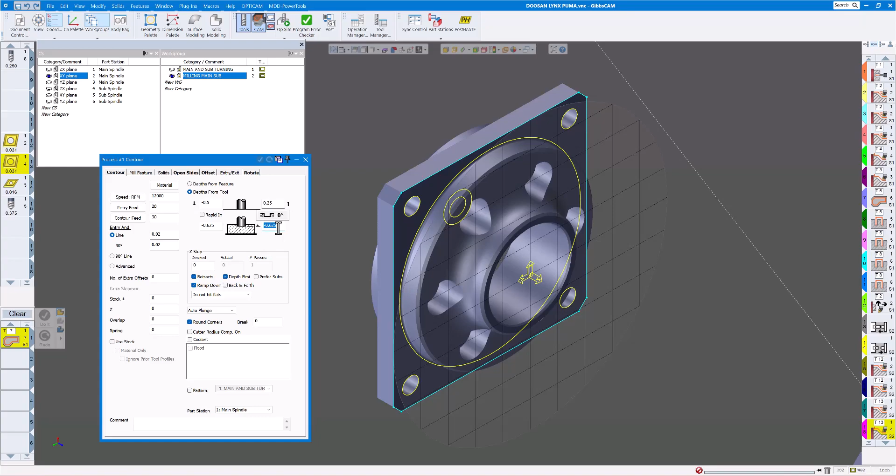As far as how deep I want to cut, I'm going to rotate this around just a little bit. Alt click the back side there, you can see that's 7/8. I'm probably going to go minus 0.9, that'll get me a little bit past without actually running into my jaws.

I probably want to do kind of an entry and exit there, a nice transition, maybe quarter inch on both of those. It's probably a little much to do in one pass, let's take a look. I don't want to do a ramp down, let's do a 275 depth of cut, that's just fine. I'm going to leave a little bit of stock for finish there, and put in our RPM and feed rate.

Depending on what options you have on your Puma or Lynx, it'll depend on if you can use this RPM or not. If not, you change those.

So let's start up here. Let's actually go to the home view. Let's start right there. We want to climb mill, so we want to go this direction. Go back to the isometric view.

And click on do it. Well, actually, before we click on do it, I don't want to put it at the end of here. I want to do it before the sub-spindle transfers over, before we grab the sub-spindle. So I want to put it right in between operation 11 and 12, just click on this little triangle right here and click on do it.

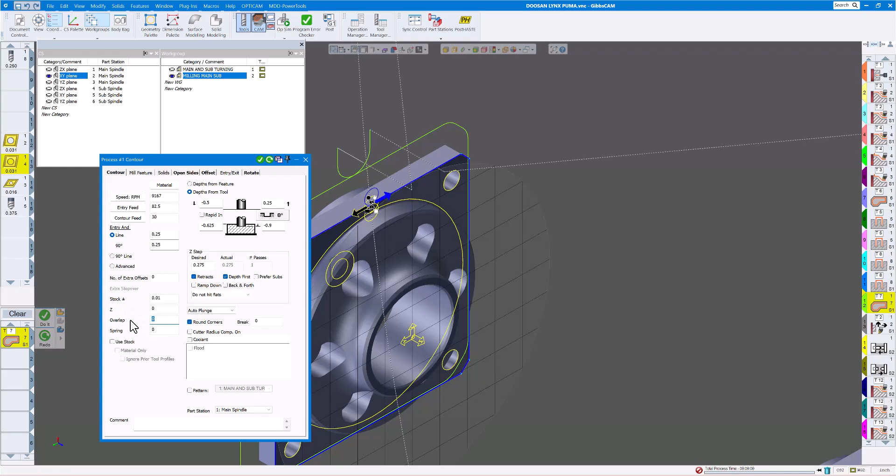And then you'll see the entry and exit there. Looks pretty good. Now if I don't want a witness line there, it's starting right at this tangent point. I could also open this up and say let's do a 100 thou overlap there. Let's click on redo, you can see we have a little bit of overlap there. Now let's render and let's see if this is really what we want to do.

So I'm going to turn on the rendering. But before I do that, I want it to stop before operation 12. So I'm going to turn on the stop sign and say I want you to stop before operation 12. That way I can speed this up so I don't have to wait watching it render.

Okay, now let's slow it down, let's see what it looks like. Pretty much too deep of a cut, I would say. You're probably going to snap your end mill or not be able to evacuate the chips, so let's fix that.

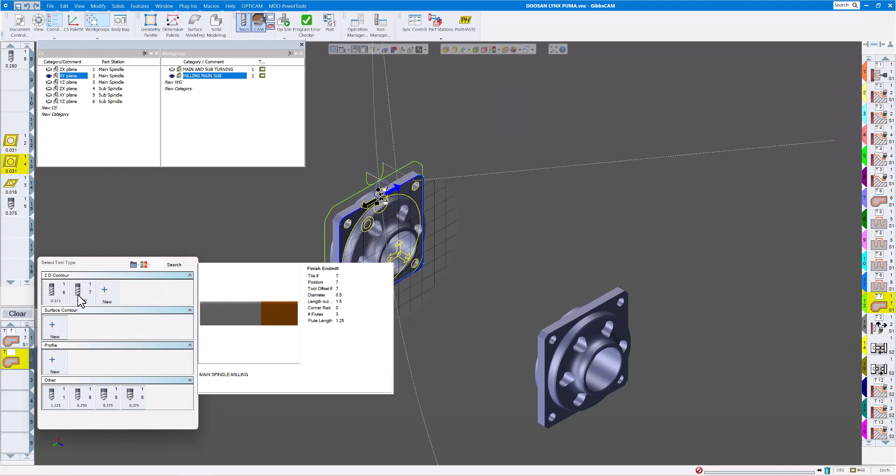Let's open up this process and say I want to do 2 more extra offsets. And maybe we're using a 1/2 inch end mill, maybe 200 thou extra stepover, leaving stock there. Now since we're going to use the same tool to finish, I'm just going to put a second process in there with that same tool. Everything else will be filled in for you automatically here because it's just taking everything we did on the first process, except now I want to do 0 and 0 stock for the finish.

Okay, so we have this operation highlighted already, so just click on redo, and now we have our 3 separate cuts. Let's again, operation sim. Okay, let's slow it down. Much better.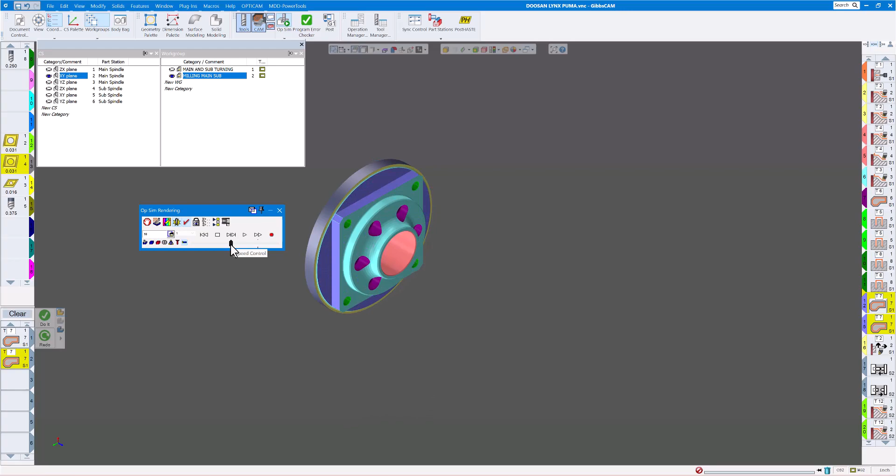Second pass. Third pass, and then our finish pass. Then our finish right here. Now everything looks pretty good on the main spindle. Now let's finish this off by making sure our sub-spindle's back on.

Speed this all up here. Actually, let's rewind it and start from the beginning. Okay. There's our milling, transfer to the sub.

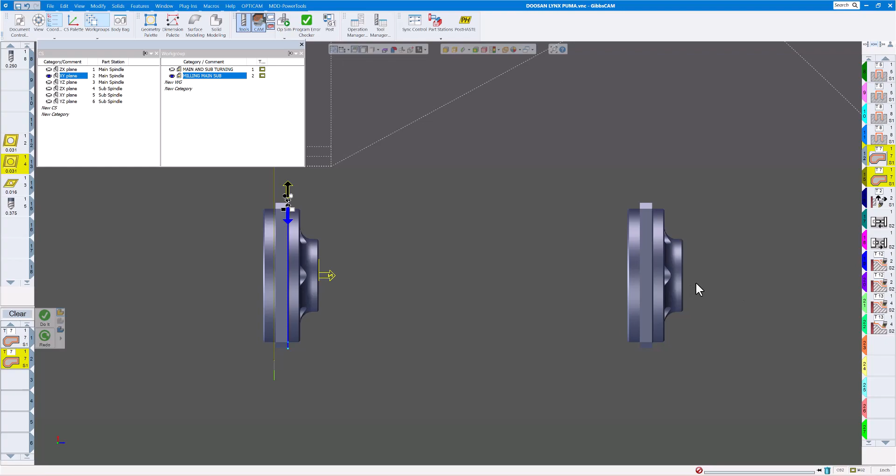Okay, now we need to finish off the backside there, and the reason you're seeing some of this in the sub-spindle is we haven't unloaded the part yet at the end. So everything else here is almost done on the sub-spindle. First thing I want to do though, before we finish off, is I want to deburr these holes with the 3/8 spot drill before we finish off.

So let's clear this out. Let's go to our XY on the sub-spindle and our milling on the sub-spindle. We haven't pulled any geometry off of the milling on there. I'm going to turn off cam for a moment.

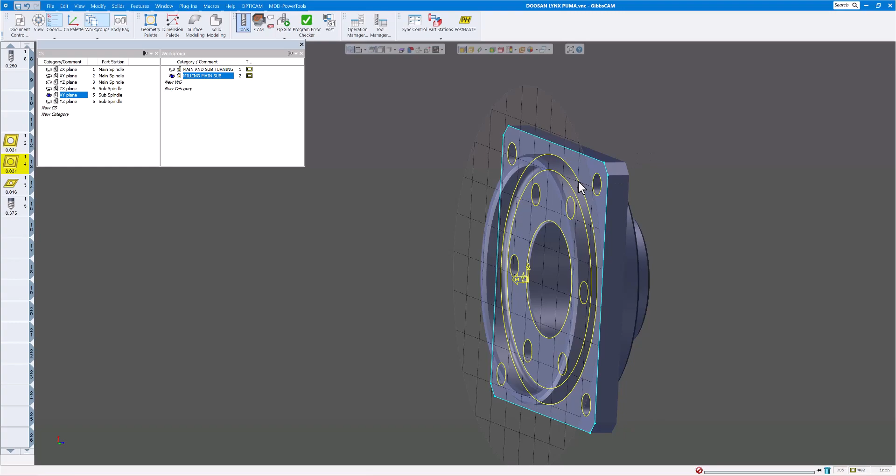I'm just going to click on face selection, select this face, and extract the edges. And I'm going to click on this face and do the same thing there. So now we have all the holes we need. Really don't need this, we can leave it in there, just delete it. Doesn't matter, really don't need that there either, unless we're going to chamfer that, which we might do.

So now I need to turn on my cam. I'm going to choose a hole process with the sub-spindle 3/8 spot drill, combination spot drill chamfer tool. Feed in, wrap it out. Make sure you're on the correct spindle first. And first let's highlight this, alt-click. I can see that's, well first I want to make sure you're on the correct plane, which I'm not. So make sure you're on the XY plane.

Now if I alt-click, you can see that's better, that looks a lot better. Click on the front there. There's my rapid 2-point. That may be a little much. I may stay 1/4 inch away as well. And again, put in the diameter you want to cut, 0.270.

There, rotate. Since it already has 5 and 60 in there, we'll just do the inside holes first. So I'll click on the first hole. Let's go to our home view. We want to make sure the X is on the positive side, so we're not trying to go underneath the spindle. That'll be a good one there to select. And let's click on do it. So that'll be our holes on the sub-spindle to deburr.

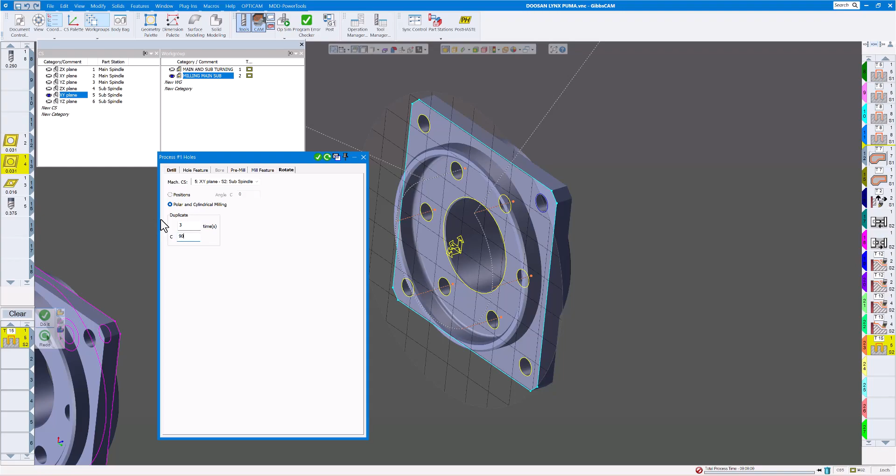Be a little bit easier to see there. Now we need to do the same thing with the outside holes. It's the same depth and everything. So let's just choose this hole here. Go to our rotate command, change this to 3 more times at 90 degrees. Click on do it. And now we should have deburring on the sub-spindle.

So let's rewind it. Let's move it over to here. Let's do a sub-spindle view, Operation Sim, and see what we have. Turn our op sim on, slow it down a little bit. Let's turn off the geometry as well and play.

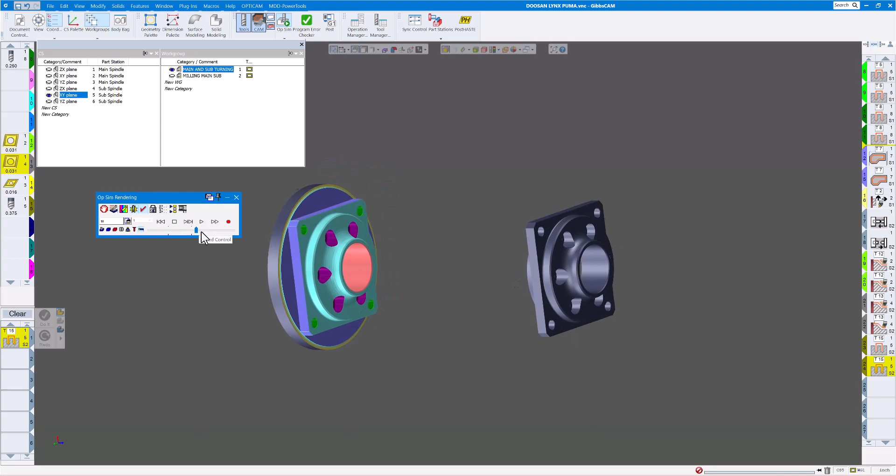And here we have our main spindle. Let's finish off the flange. Now we're going to do the transfer to sub-spindle. Face it off, bore, and chamfer. So now our part looks pretty good.

Looks like it's all finished. Now maybe we want to deburr the outside. Let's just show you that with the same tool. We're going to actually use the 3/8 end mill spot drill, combination spot drill chamfer tool. Let's go to the milling on here and clear this out. Let's put a contour in here with our 3/8 spot drill chamfer tool.

Again, make sure you're on the sub-spindle, make sure you're on the XY plane. Polar and cylindrical is what we want. Our material again is actually 1/4 inch there. I'm going to wrap it to actually 1/4 inch there. Since it's a 3/8 spot drill, let me bring this up here. We only have .187 of an inch to play with here before we start cutting on the flat side or the straight side on here.

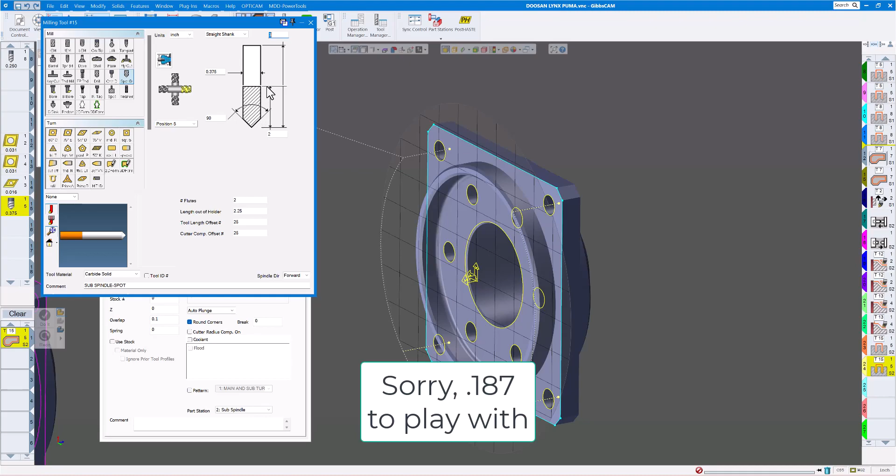So again, I'm going to click on there, 1/4 inch, and I'm going to go minus, we'll say 1/8 of an inch there. That'll get me pretty much close to the diameter there, instead of cutting with the tip. The tip, usually you don't have very good finishes. I don't need really overlap there, so let's zero this out. But this is the stock. How much do I want to leave? If I put 0 in there, it's just going to barely touch the end mill, the chamfer to this edge there, so it might deburr it, but it's really not going to give us any kind of chamfer.

So I want to put a 20 thou chamfer. I'm going to say minus 20 thou there. Let's just click on, let's just go to home view to make sure the X is on the high side there, which we want. Okay, that's what we want there. And click on do it.

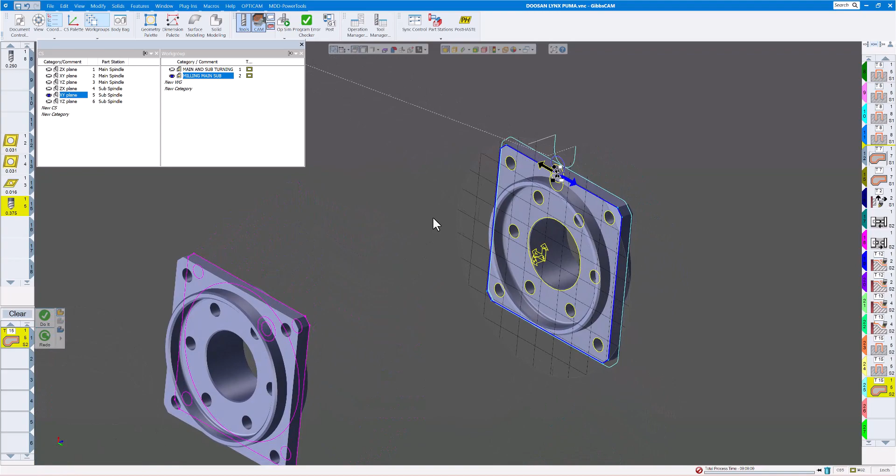And let's rewind that and see where we're at. Slow this down. Let's actually run through the whole thing again. Okay, we'll transfer to the sub. We'll stop it before the chamfer. Slow it down. And there's our chamfer.

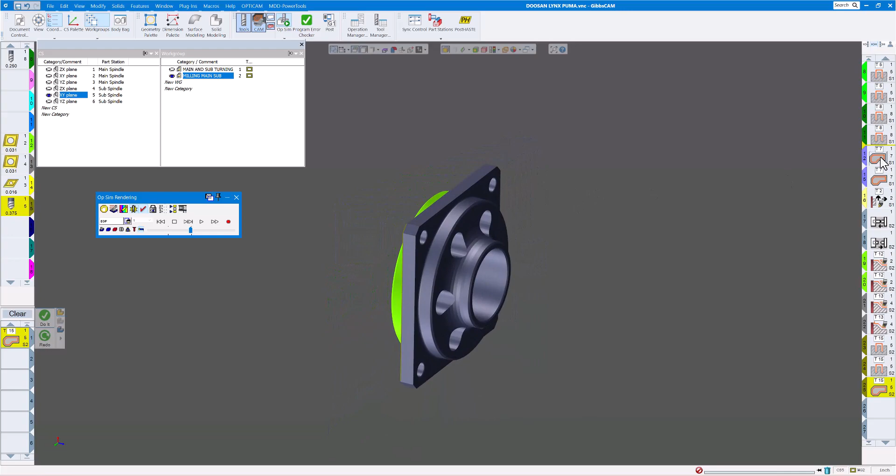Looks like we're staying away from this surface here. So we have our nice little chamfer on there, so the part looks pretty good. We didn't do any chamfer on the front. Now if we wanted to, we could go back and do the same thing on the main spindle, and we just need to click on the operation in between the operations which we want to do the chamfer on there, but it looks pretty good.

Now the last thing we want to do, if I rewind this, click on OpSim again, and rewind this, you can see right now there is still material in the main and the sub spindle, which we don't want. We don't want any material in the sub spindle when we're starting off, because we're going to transfer over, and if we don't unload this, it figures the part is still in the sub spindle and it's going to come over and crash into our main spindle. So we want to make sure we unload that. So let's just clear this, and the last thing we probably want to do is a utility, and actually probably no tool.

Click the arrow down, and there's a couple different options on the Puma Lynx: parts catcher in, parts catcher out. If we want the parts catcher in, we'll click on that, and we want the parts catcher on. The only choice we have is main spindle there. That's fine. So normally on some of the machines I usually put 8 inches, so I bring the sub spindle up 8 inches so it's right under the parts catcher, and click on do it.

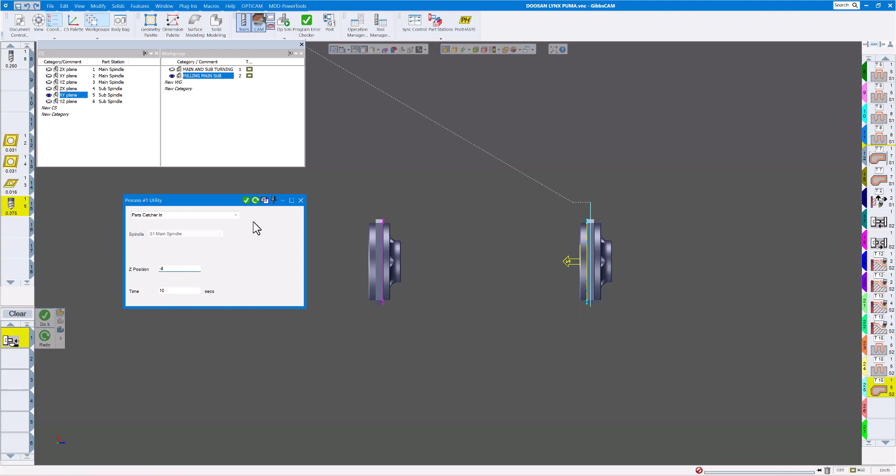That's going to put your M codes in to bring your parts catcher in. Now the next thing I want to do is unload the spindle. You have auto chuck or you have parts catcher, so if we do the parts catcher, sub spindle, that's great. We'll click on that. Now we have that. Now the last thing we want to do is probably bring the parts catcher back out. Click on that, and that's good.

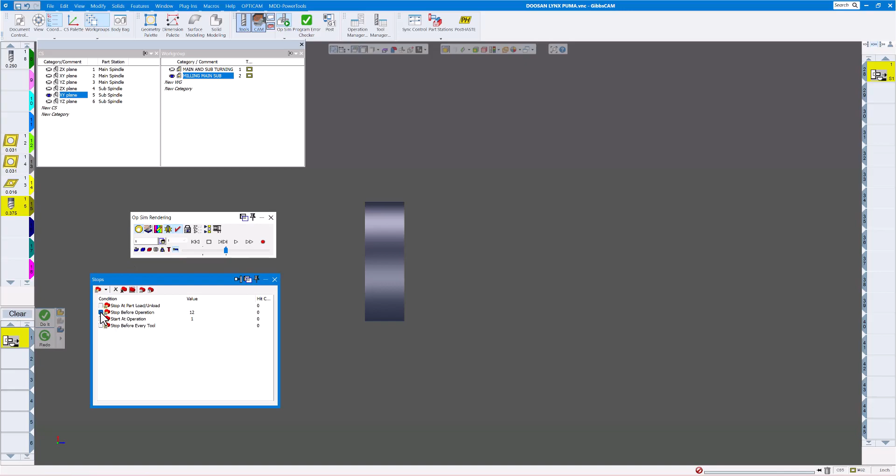Now when we start off in our rendering, you'll see there's nothing in the sub spindle there, which is how we want it. So if we run this completely through, let's turn off all the stops there and just let it run through the whole thing. We'll do a cutaway there.

The only problem you can see there is our screen is blank because we unloaded everything. So if we want to see the finished part before we unload it, where we start to unload it is operation number 26. So if we go back to the rendering here to finish off, and we do stop before operation 26, that should show us the part before we unload it.

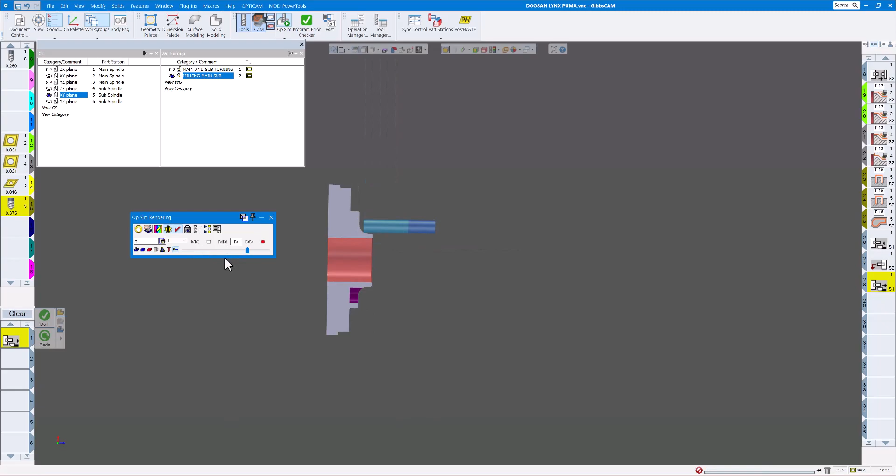So let's rewind, click play. And let's turn off the section view there. And if we look at our part, it looks very good. Everything there is done. Main spindle, sub spindle, everything looks okay. Now if we finish this off, you're going to see it disappear, because it went into the parts catcher. So this is how to run the Puma.

We'll post the code here just so you can get an idea of what the code looks like, so you have a better idea how we program the Lynx and Puma machines. Let's bring up this post here. I have a Puma post here, a popular one. Let's click on process. As you can see, this is our first operation.

Here's our 80-degree diamond for the roughing, and the roughing of the OD. Now this one I didn't do canned cycles. As you can see, this is longhand, but if we check the box that says canned cycles, we would get the G72 on here. But as you can see on the OD roughing, we have the standard canned cycle double line format. Here's the inside boring bar, double line again.

Let's get down to some of these other operations here. Here's our milling, finish end mill. Now here is the transfer here. You can see we wanted to get the turret out of the way first, so we brought up tool number 2, and we went to actually Z0, so that brought the turret out of the way.

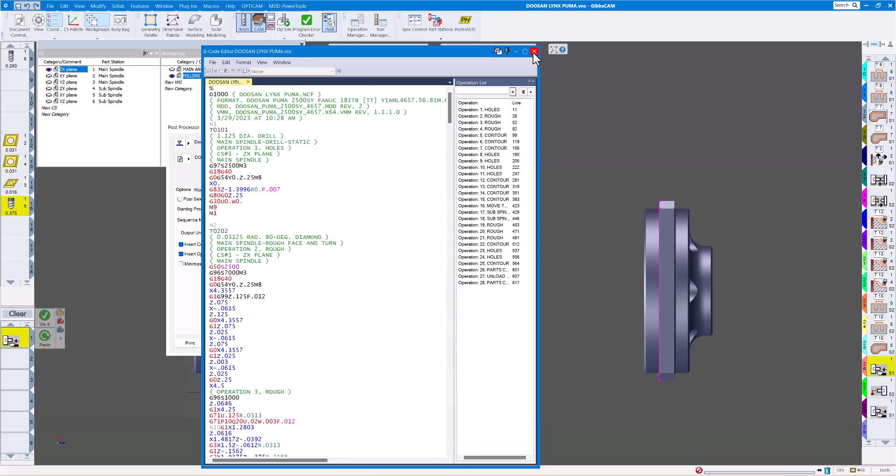So with the post, when you purchase the post from Gibbs, you have up to 6 months to have Gibbs make any changes at no charge. So you can have Gibbs modify this post how you like it to run, what fixture offsets you would like to use in the post, and how you would like the things to go. This would be pretty much customized for how you like to run your machines, because not everybody's the same. Some have high pressure, some don't. Some have different M codes for the high pressure, but that can all be modified in your post very easily in Gibbs. And like I say, once you purchase the post, you can have all that changed so everything works perfectly, so you don't have to do any editing on your program.

So hopefully this helps learning how to program the Doosan Lynx and Puma machines, and thank you for watching.